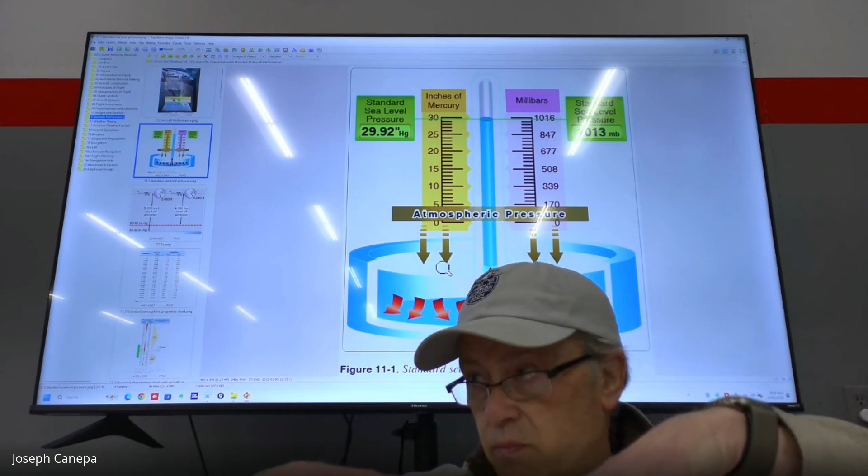Standard temperature lapse rate -- what a lapse rate is, is the change in temperature or pressure or whatever it is. It's a rate that changes as something else changes. In this case, as altitude increases, there's what we'll call a lapse rate, and you can have a temperature lapse rate and you can have a pressure lapse rate. So in the book there, they talk about standard temperature lapse rate, which is one in which the temperature decreases at the rate of approximately 3.5 degrees Fahrenheit, or 2 degrees Celsius, per thousand feet. That's important for you to know. I would highlight it and underline it because you need to know what a standard temperature lapse rate is.

What that is saying is that in a standard atmosphere, if let's say everything was standard, it was roughly 15 degrees Celsius, and we're at sea level, and the atmosphere was standard, we would be able to measure a drop in temperature at every 1,000 feet by 3.5 degrees Fahrenheit as we rose. Again, that's really important. It's a temperature lapse rate, and that's the standard temperature lapse rate, 3.5 degrees Fahrenheit.

A standard pressure lapse rate is one where the pressure decreases at a rate of approximately 1 inch per 1,000 feet. So what that means is, well, let's see -- does anybody know what the standard atmosphere is? ISA? This is something you definitely want to write down. You definitely need to know this for the test.

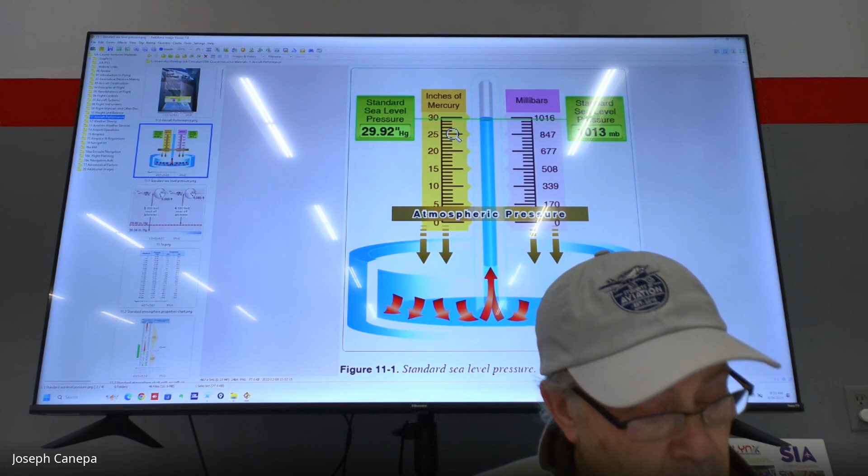29.92 for pressure. What's the temperature? Yeah, roughly 15, like 15.6, I think is where it is, something like that. Yeah, or 15 degrees Celsius, 59 degrees Fahrenheit, for a standard atmosphere. So that you definitely need to commit to memory because you're going to need to know it for the test. All right, so the standard pressure lapse rate is one in which pressure decreases at a rate of 1 inch per 1,000 feet.

So if you look over here, there's this table. This describes a standard atmosphere. So you have at sea level, 0, you have standard pressure of 29.92 inches, and the temperature should be roughly 15 degrees. And at 1,000 feet, we have 28.86 and 13 degrees -- again, 2 degrees per 1,000 feet. That's what we're seeing, that's the temperature lapse rate. If I go between all these, you can see roughly, it's an estimate, roughly 2 degrees per 1,000 feet.

With pressure, the lapse rate is roughly 1 inch. Again, it's roughly 1 inch. So we go from 0 feet, which is sea level, to 1,000 feet, we drop an inch there. Now we're down to 28 inches. At 2,000 feet, we're down to 27.

3,000, we're down to 26. So again, that's called the International Standard Atmosphere. It's this right here. That's the International Atmosphere, or ISA, as we sometimes call it.

That's something you definitely have to commit to memory. Obviously, when we go flying, it's unlikely that we would actually fly in an ISA, or International Standard Atmosphere. So we have to provide corrections to find out what our atmosphere is really going to be like and how the plane's going to perform. We'll get into this here in a second.

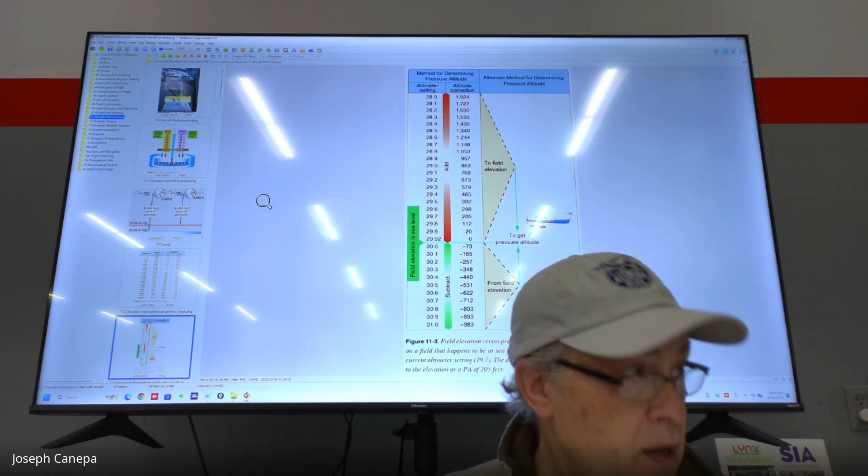Let's actually calculate what the pressure would be. Let's say our altimeter right now, the Bear-Rudell's altimeter, is 30.33. Can anybody tell me, is that a higher or lower pressure than the International Standard Atmosphere? It's a higher pressure, which tells me the air is denser today than it would be on a standard day.

So we take 29.92, subtract the current altimeter setting at Bear-Rudell's airport, which is 30.33. No, we don't just do the 30—we actually subtract the whole value. Let's work this out; you can have a calculator when you take the test.

29.92 minus 30.33, which is the current altimeter at Bear-Rudell, gives us minus 0.41. That's the difference. Well, we know the lapse rate for pressure—what's the altitude difference per thousand feet, or per inch of mercury? What's the lapse rate for pressure?

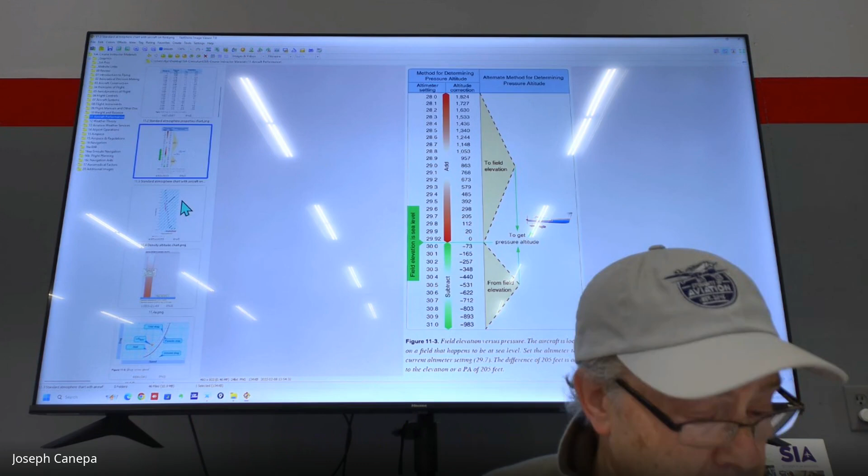So the first thing to calculate in calculating density altitude is, number one, to know what altitude are you at. Right now we're at roughly 1,000 feet. Let's see what our density altitude would be if we go from like 10 degrees all the way up to 100 degrees. So let's start at 10 degrees.

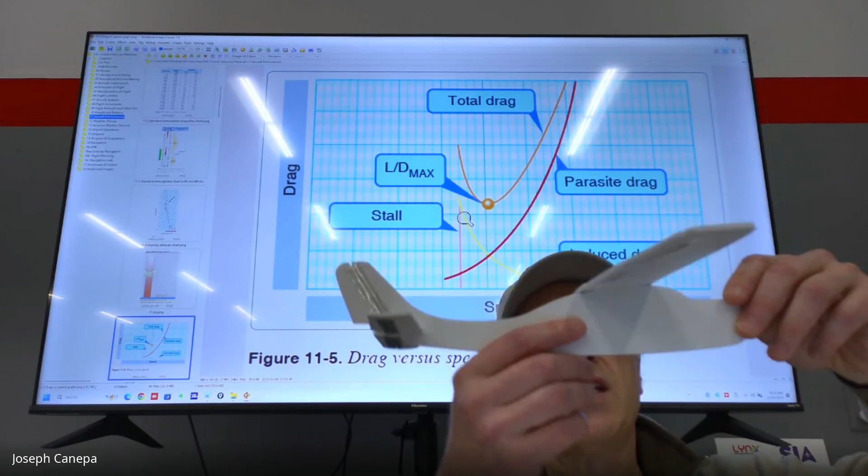So at slow speed, what this is showing us is your induced drag—the amount of drag we're inducing on the aircraft. If I want to fly at a high angle of attack, my flight path is this direction right here. As I fly along, I have to have enough thrust to keep that plane in the air. There's lots of induced drag right here. Again, the flight path is in this direction. So there's our flight path. We have to have lots of thrust to keep the plane up.

This is what we call the backside of the curve right here, this area from right here over to this side. So at slower speeds, we have to have lots of thrust to keep the plane in the air. And at some point, if the plane gets too slow, the wings are going to stall—it stops producing sufficient lift, and the plane will just go into a stall.

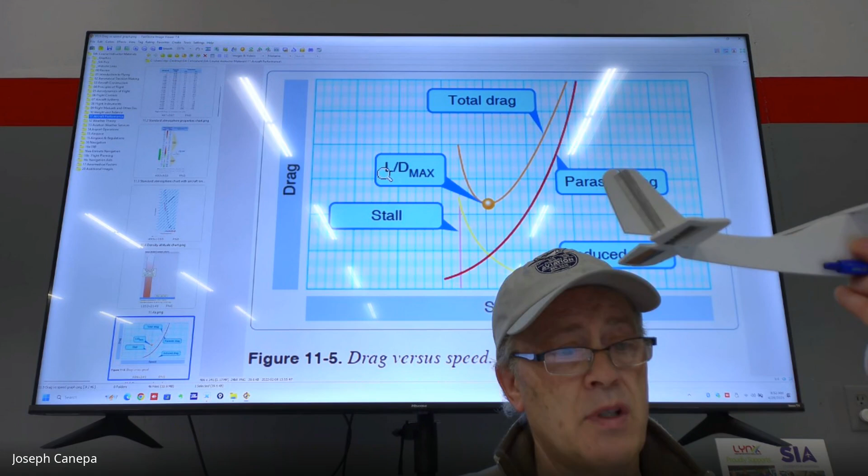As we increase our speed, let's say I start lowering my nose, keeping my altitude the same. As we start increasing the speed of the aircraft, lowering it, you'll see it gets to a point called LD max—that stands for lift to drag maximum. You're going to get the maximum amount of lift per drag at this point right here. There's a lot of numbers, a lot of performance characteristics at that point that we want to be aware of, which we'll go into in a second.

And then when we start speeding up, you can see two things here.

The induced drag decreases, and that makes sense, right? Because induced drag is when I'm flying along like this, the aircraft is creating all the induced drag.

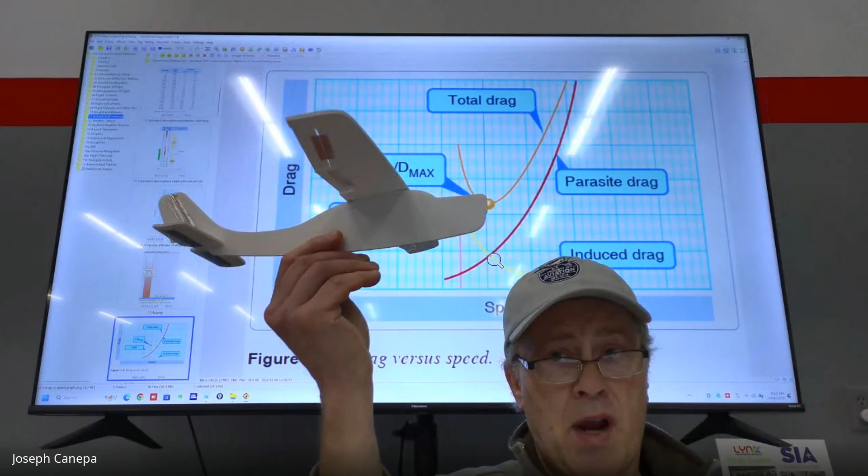We're inducing that by pulling the yoke back, and the air is hitting the wings. That's induced drag. However, when we go past this point, this L/D max point right here, induced drag just keeps dropping. So this aircraft flying like this has much less induced drag than this one flying like this. This has got lots of induced drag.

Hold my hand like this out the car window, lots of induced drag, lots of lift there. So it's producing a lot of lift, but it's just creating a lot of drag. When I lower the nose and fly straight right here, again, induced drag drops off.

The other thing that increases, however, as induced drag decreases, is parasitic drag. Does anybody remember what parasitic drag is? Speak up nice and loud.

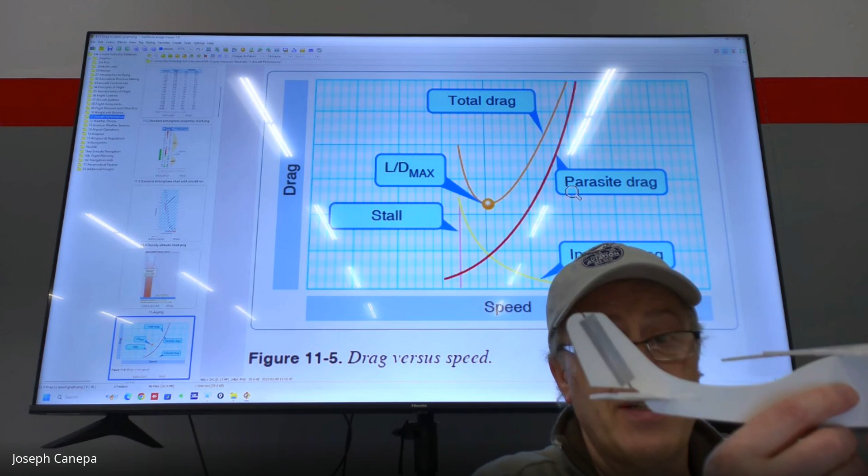Yeah, all the little tiny things, like the fairings and stuff like that, those are all parasitic drag. That's the stuff that the wind just can't get past. Again, there's always going to be some parasitic drag. It could be just rivets that are parasitic drag. So those things will all create drag.

And as you go faster through the air, that parasitic drag increases. So as our speed increases right here, you can see our parasitic drag increasing. But again, induced drag decreases.

So when you add those two curves together, this is the curve that you get. This is our drag curve right here. This half over here is the back side of the curve, and this is the front side of the curve.

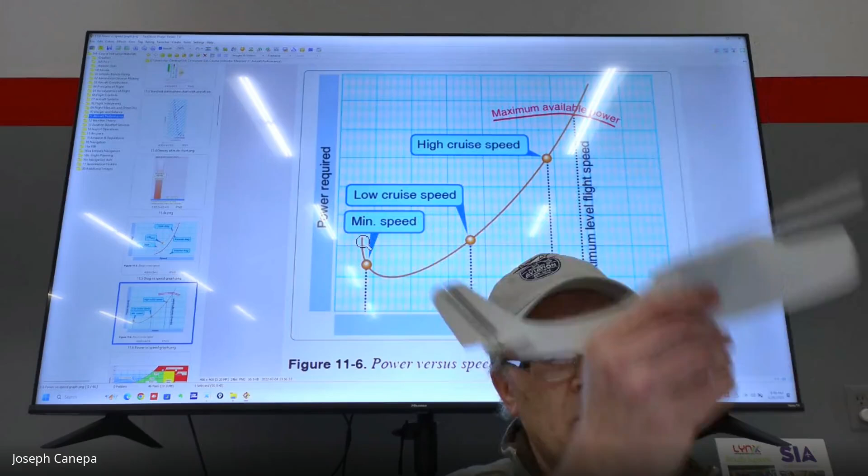And then obviously we have maximum power available. That's basically the maximum thrust that the aircraft can produce. Now some aircraft may have certain limitations. You may have lots of thrust, but maybe there are limitations on the airframe itself. It can't support going beyond a certain speed or something like that.

That has nothing to do with this. This is just the maximum power available in flight, and that would be based on the engine, the power plant itself. Okay, great. Yeah, I think we went through this before.

So let's talk a little bit about angle of climb and rate of climb. This is on page 11-17. Angle of climb refers to climbing for distance.

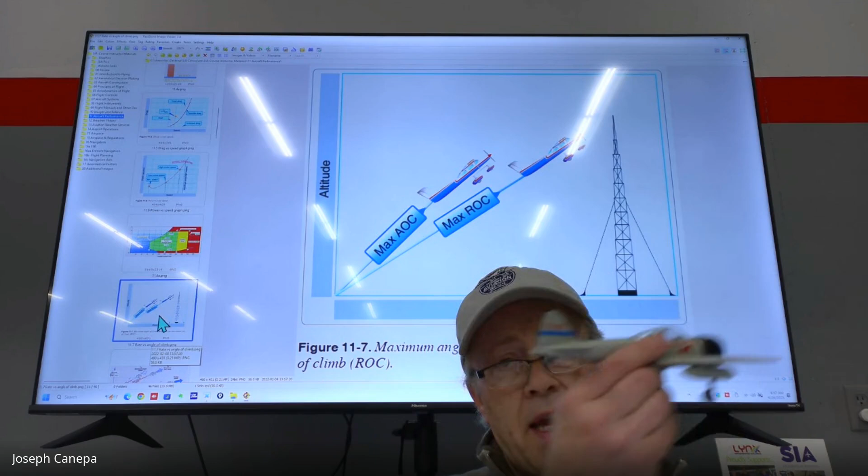So if you think of angles, let's say we've got a tower over here. I'm just going to hold this up right here. There's a tower right there. We need to climb over that. I can use what's called a best angle of climb to get over that.

There's also the best rate of climb. That's different, that's based on time. The angle of climb is based on distance. We want to get over this thing. We don't care how long it takes us, we just need to get over that tower.

And you'll find this at a lot of small airports. You'll have trees at the end of the field or something like that, and maybe you're fully loaded, maybe the density altitude's really high that day. You need to get over those trees at the end of the runway, so you're going to use your best angle of climb.

To do that, the aircraft manufacturer is typically going to have that published in the AFM, the flight manual for that particular aircraft, or the POH. It's just a number, VX is the actual velocity number that we're going to use there.

We'll see it later in the chapter. It goes over VX, that's best angle of climb. So we read that, and if it said, let's say, 60 knots, we would take off, get our airspeed set at 60 knots, and climb over that.

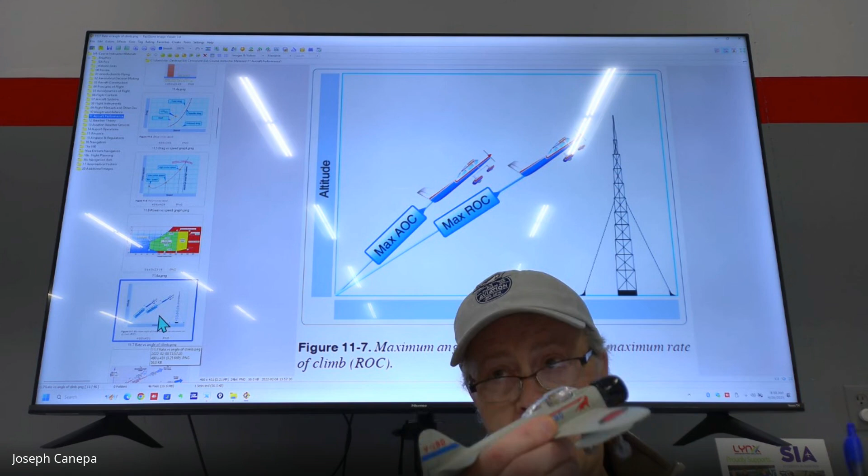Now, the difference between the best angle of climb and the best rate of climb is the best angle of climb is going to get you the highest altitude for a certain amount of distance. We don't care about climbing to altitude fast. If you want to get to altitude fast and obstacles are not an issue, then we use the best rate of climb.

The best rate of climb is based on climb per minute. AOC stands for angle of climb, and ROC stands for rate of climb. Again, VX, AOC is VX in our books, or the velocity speed of X, and the max ROC would be the rate of climb.

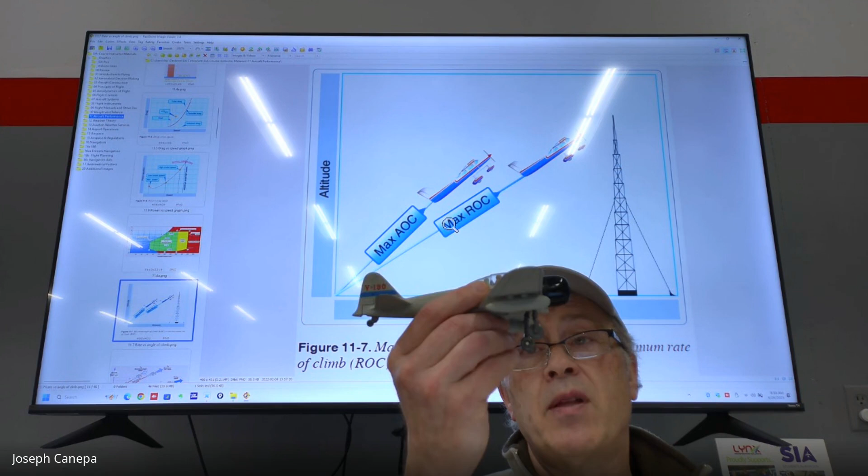Rate of climb is going to be an airspeed that is typically faster than the angle of climb airspeed. So in that case, we're climbing at a slightly different pitch, the nose isn't going to be pitched up as much. We've got full power on the engine for both angle of climb and rate of climb, but our pitch is not going to be as high for rate of climb.

What that means is if I need to get over a tower and my rate of climb is really fast, I'm going to hit that tower. If I'm using the best rate of climb, I'm going to hit that tower. Whereas with best angle of climb, it's going to take me a while to get up there, using a lot of thrust, but I'll be able to get over that tower when I fly over it. So again, that's the difference between angle of climb and rate of climb.

And again, the two velocity speeds, VX is what? Is that rate of climb or angle of climb? VX is angle. So the way to think of it is: the letter X has lots of angles in it, that's a good memory mnemonic. If you see VX, that means it's the best angle. VY is your best rate of climb, doesn't have as many angles. You'll need to know that for the test as well.

All right, let's see here. Yeah, they go through some other documents or other stuff here. Rate of climb, let's see here.

Okay, so what are some things that might affect climb performance of an aircraft? Anyone want to take a guess? Air density, absolutely. What else? How about on the plane itself? Anything on the plane that might affect it? Yeah, weight definitely is going to affect it. Yeah, the balance, absolutely. If the balance is out of the CG is too far aft or whatever, that could affect it.

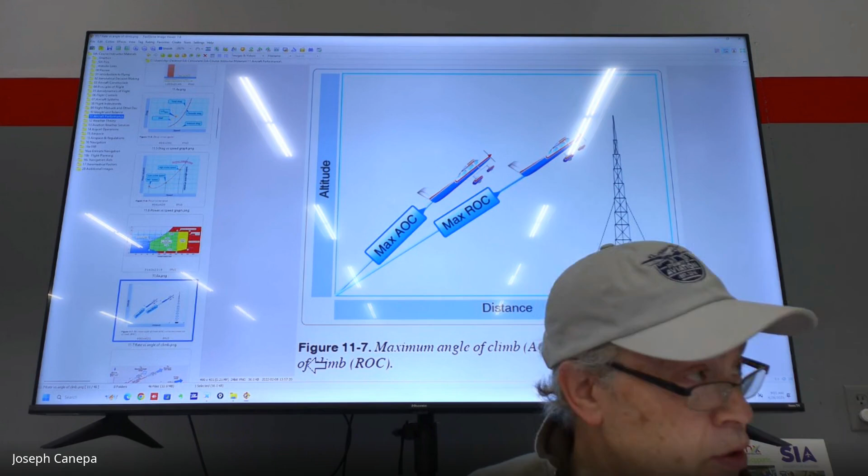Drag, yeah, but I mean, you're always going to have drag with everything, right? So unless you're carrying like a banner or something like that, it's not going to change from one thing to the other. But weight does, weight does.

And also the altitude that we're at. If we're at a higher altitude airport, is our climb rate going to be higher or lower? Let's say we're at Bearwood, 1,000 feet, we take off, and then we take that same plane out to Laramie, Wyoming, where it's like 7,200 feet, and take off. Is the climb performance going to be the same out there as it is at Bearwood? No. Why? Yeah, the air is less dense, it's at a higher altitude. Okay, good, right.

Let's see here, so there is range performance, and we'll actually dive right into the charts. They've got a lot of diagrams in there, they're great, but I don't think you're going to see any of those on the test. What I really want to get into is the performance charts and things like that.

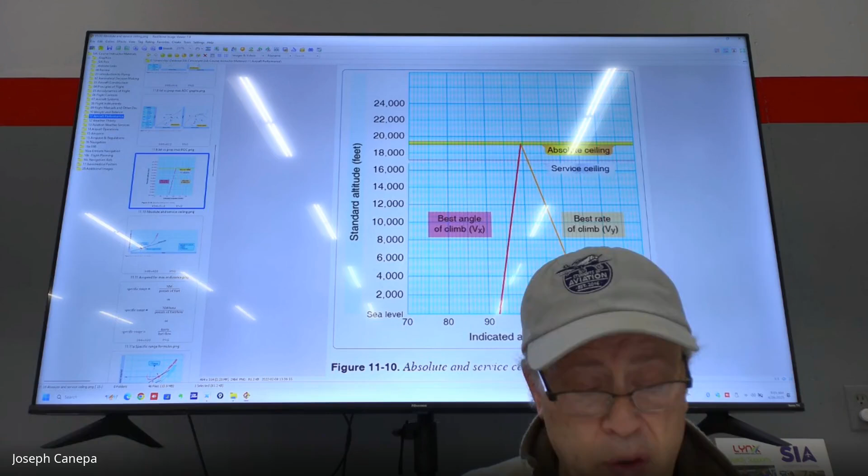Right, so range performance really has to do with how far you can take the aircraft with any given load of fuel. That's pretty self-explanatory, I'll let you read through there—we're not going to get into that, there's not a lot of discussion of it. Usually it's based on pounds of fuel on there.

Maximum endurance condition would be obtained at the point of minimum power or power required, and that gives you the maximum amount of time you can spend in the air. So again, maximum endurance is essentially: you've got a gallon of fuel, and you want to get the most time endurance. We're not worried about distance now, we're talking about endurance—how long can I keep the aircraft up in the air with a gallon of fuel?

And you're going to reach that maximum endurance condition when you've adjusted your aircraft, leaned out the mixture or whatever, and then you're going to produce the maximum endurance.

Maximum range, however, is going to be the longest distance for that same gallon of fuel. So let's say I want to get maximum range out of the aircraft—that's a setting we'd have in the aircraft, usually with power and throttle, right? If you have a constant speed prop, we'd adjust that, and then obviously mixture—we have to configure at least the throttle and mixture. We also have to configure our flaps if that would affect it. And whatever that configuration is will yield the best range of the aircraft. Again, maximum endurance, maximum range—two different things.

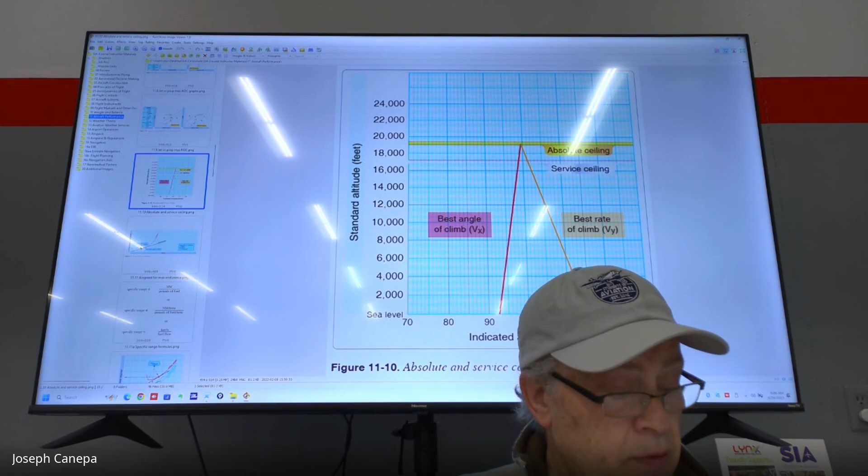That's going to give us roughly our maximum endurance, I believe—not necessarily maximum range there. There are some other variables, but what you need to know is that the aircraft will stay up in the air longer at this L/D max right here. And your range is going to be really extended if you stay in this area right here. Okay.

Some other things to consider on page 1112: runway surface and gradient. A grass strip is going to create more drag on the aircraft. When it lands, those wheels hit the soft ground, and there's a lot of drag there. When you're trying to take off, as those wheels move along the grass, there's drag on that too, so you have to overcome it as you apply power.

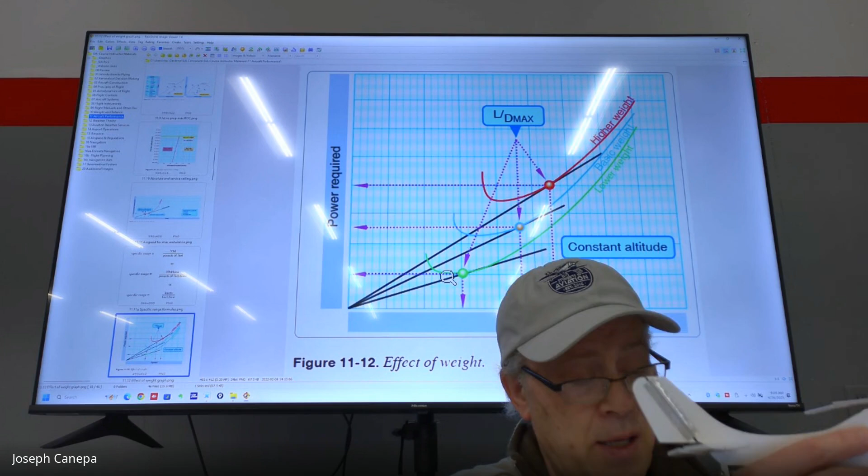There's a special technique we use when we fly grass strips, especially short ones. We try to get into ground effect, stay in it, and accelerate in ground effect, not touching the grass. So we want the aircraft just above the ground, accelerate there, and then take off. That's the challenge with runway surface.

You may be landing or taking off at a grass strip. Again, a gravel strip is going to have lots of drag, a grass strip is going to have lots of drag, but cement or asphalt is not going to be so bad — it's going to have less drag on the wheels.

And then there's the gradient of the runway itself. If your runway slopes upward and you've got to take off, we have to overcome the effects of gravity on the runway, so we're going to have to give it more thrust. It's probably going to take a lot more runway to build up enough speed to take off.

If we have a gradient downward, that's a steep place — there are places out in Nepal that have really steep runways. But in any case, if the gradient slopes down like this, gravity is working for us, and we can build up thrust really fast and take off from there. So those are performance considerations.

The other thing is water on the runway — we talked a bit about dynamic hydroplaning. This is on page 1113. Water on the runway always reduces friction between the tires and the ground, and it can reduce brake effectiveness.

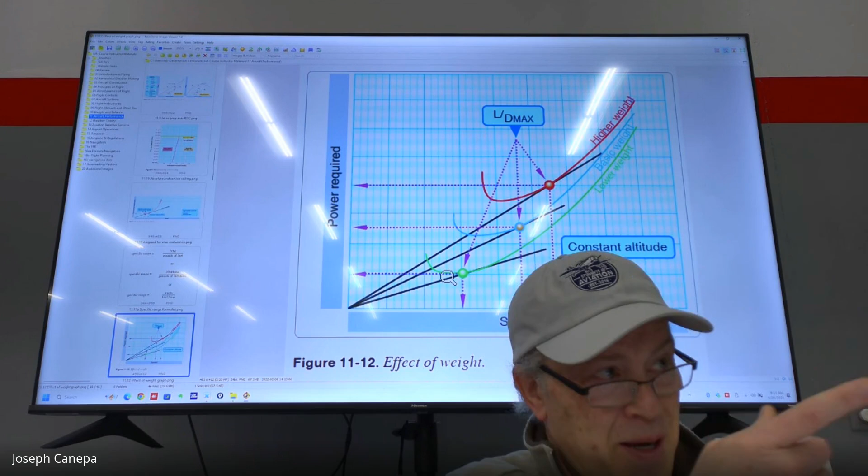Yes. Go off on a cliff? You could, it is possible. The drawback is you'd have to make sure you didn't get into a spin as you fall off of it. But if the aircraft stays in the proper orientation, yeah, absolutely, you could go right off the cliff like that James Bond movie — I forget which one, where he drops off it. So it is possible, yeah.

As long as the plane doesn't start a spin prior to building up airspeed — and that's a good point, because when you get into a stall, the wings stop producing sufficient lift and the nose is going to drop. The first thing we want to do is push the control yoke in, not all the way, just relax our pressure on it, which causes the nose to drop and airspeed to increase immediately. Air starts flowing over those wings again, and they start producing lift to keep the aircraft going.

All right, so let's take a look at some charts here. This is a typical chart you'll see in a lot of Cessna manuals, and we're actually going to walk through a couple of these processes. So, takeoff distance — notice this would be a page taken right out of the Pilot's Operating Handbook, or the AFM, the Flight Manual. So you've got conditions, and this tells you what the standard conditions are.

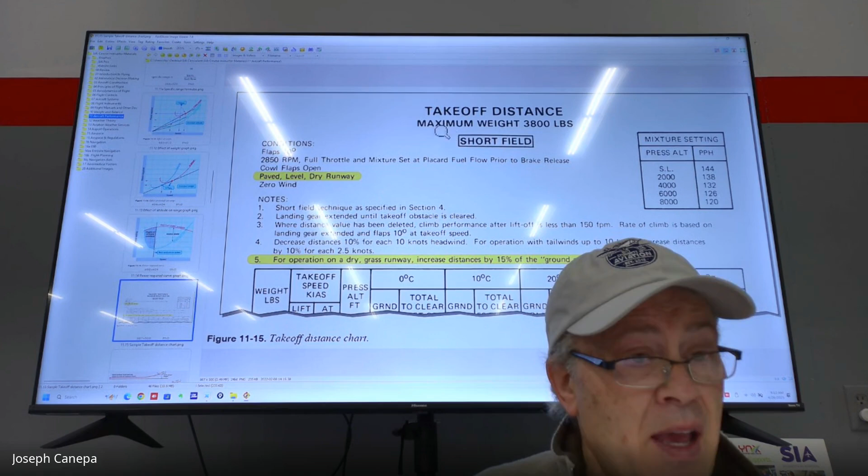Obviously they can't print a page for every type of condition the aircraft is in, but it gives you a rough idea of how the typical aircraft performs, and then you have to apply that to your situation. In this case, for this short field maximum takeoff distance, at a gross weight — maximum weight of the aircraft — of 3,800 pounds, flaps at 10 degrees, full RPM, full throttle, mixture set, and placarded fuel flow prior to brake release. So if you're at a high altitude airport, this may not apply.

The mixture may be set differently, cowl flaps are open. Does everybody know what cowl flaps are on the aircraft? The fronts of the engine cowling actually open up to allow air to flow through the engine, those little flaps that open to let air flow across it.

The driveway or runway is going to be paved, level, dry, and zero wind conditions. That's what they're telling you are the conditions they used when they tested this aircraft. Your conditions when you take off are going to be different, and you're going to have to use judgment to get something close to what you think the aircraft performance would be.

They talk about short field technique in section 4 of the manual. There's a section that describes in detail all the techniques you should use. In any case, you're going to see a lot of charts like this, and they blocked off over half of this one. So let's actually get into one here.

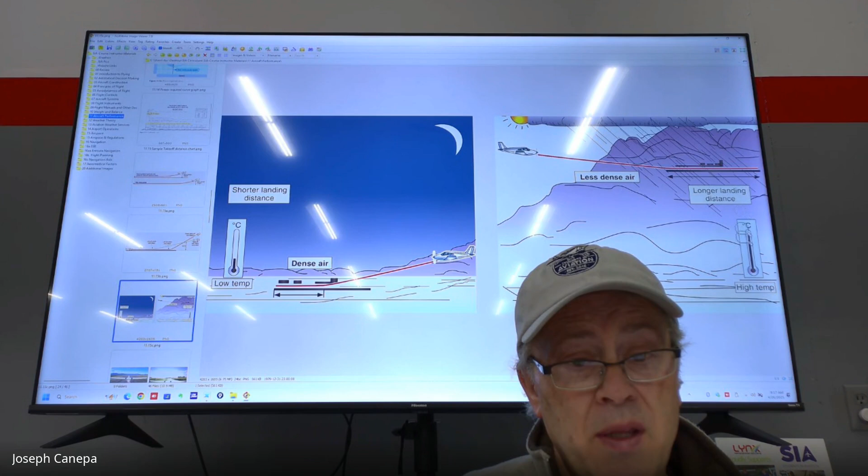If you have denser air, or lower temperature, as the airplane comes in it can use less runway. If this was less dense air, this plane would actually be using more runway. Here's an example where the plane is at a higher altitude airport, up in the mountains, so the air is less dense because of the altitude, and it's using up more runway. The other thing that can affect it is temperature - that's what they were trying to illustrate there.

You have different surfaces here - you've got a grass surface and a paved surface. In the chart supplement, which you won't find anywhere else, I think you can download chart supplements - yes, you can, I know. You can go to the FAA to download chart supplements.

Basically what chart supplements are is they actually have all of the runways in the US, and they give you specs on the runway. So like here, this particular airport is Jeffco in Colorado, and they've got runway 11 left and 29 right - it's 9,000 feet long, 100 feet wide, asphalt and grooved. That tells us right off the bat, if I go to that airport, what I'm going to be facing.

As a pilot, you should know these things before you land at an airport. So if I take off from Baraboo and I want to fly to this place, I should know the runway orientations there, if there's grass runways, whatever. And you can see here, it's got the grade, that's your slope, your gradient there, and then 5% off. Any case, that's what you're going to find in the US chart supplements, something that FAA produces.

Tire pressure - we don't think about that, but it can affect the drag. So if you have high pressure, your wheels pumped all the way up, you're going to be able to roll a lot easier than if the pressure of the wheels was let down quite a bit. It also affects the hydroplane of an aircraft.

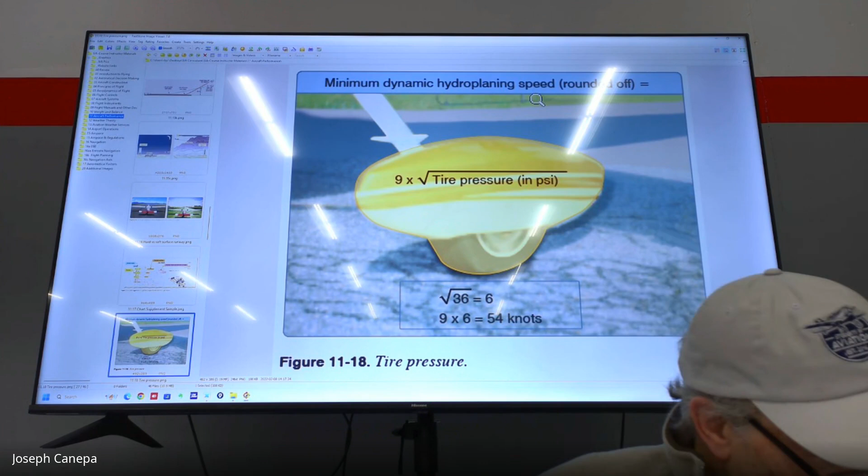They go into it a little bit, so you can actually calculate when hydroplaning begins on a wet surface. I don't think you're going to actually see that on the test, but it's good to know. They actually have the formula here to calculate it. I'm not going to go into it, just know that hydroplaning is a potential issue, especially on wet surfaces.

Another thing that affects performance is tailwind and headwinds. Do you think it would be better to have a headwind coming in for a landing or a tailwind? Yeah, you want a headwind. Why is that? Why would you want a headwind? Yeah, to reduce the speed - you want to touch down at the slowest speed possible.

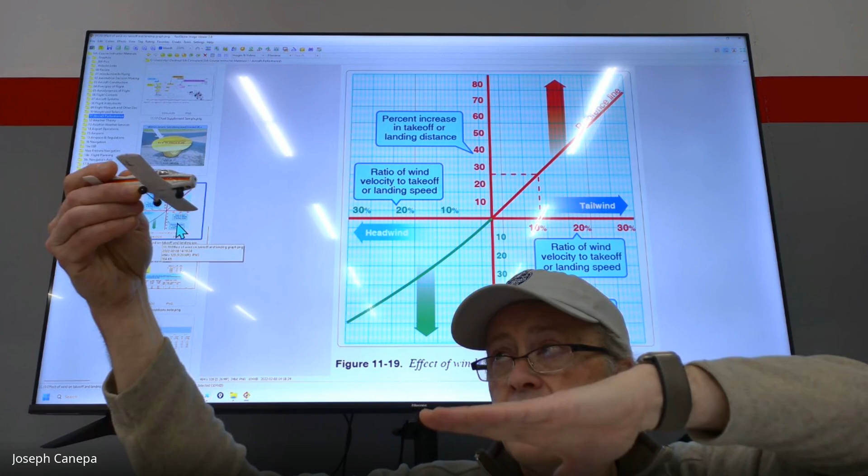Having a headwind keeps that aircraft going slow. To you it's not going to look any different, other than it's going to feel like you're coming in a little bit shorter, you've got a good landing. But if you have a tailwind - we're in a parcel of air up here, the aircraft has to maintain a certain airspeed in that air. But if the air is also moving, it's moving the aircraft much faster.

It may be coming down at the same angle as an aircraft with a headwind of 20 knots, but because the air it's in is moving with a tailwind, it's pushing the aircraft along. So we wind up taking up a lot more runway, and I mean a lot. 10 knots doesn't sound like much, but if you have a 10 knot headwind and you go around and land in the opposite direction, it's a huge difference. You eat up more runway. It's more challenging coming in because it's harder to judge how much runway you're going to use since you're moving so fast on the ground. So the ground speed with a headwind is going to be lower than the ground speed with a tailwind.

Here they talk about a headwind that is 10% of the takeoff airspeed reducing the takeoff distance by approximately 19-20%. So if it takes me 1,000 feet to take off in my airplane, with a 10% headwind, it's gonna decrease my distance down to 800 feet to get off the ground. So it has a huge impact.

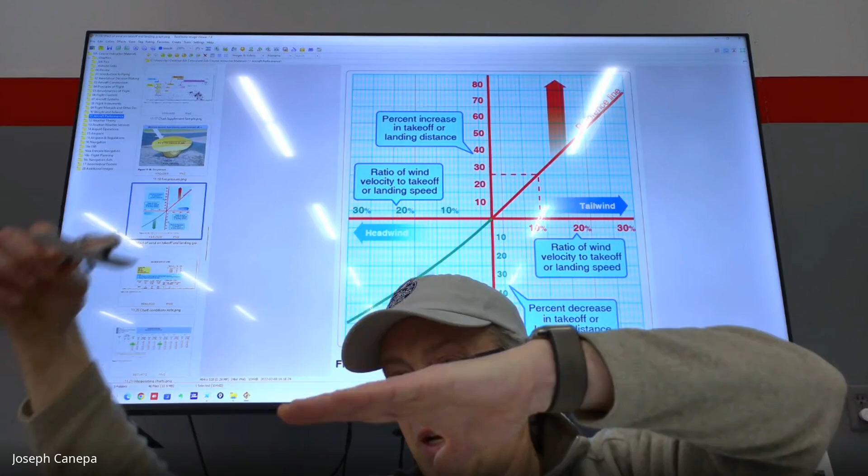So let's say you're coming in for a landing. You want to know, if you were driving, if you had a car below you that was mirroring you, you want to know how fast that car's going, right? Is that what you're saying? No, you don't need that - you can use GPS. Most, like you get ForeFlight, there's dozens of devices you can get, but basically a tablet or smartphone.

I've got ForeFlight on here, and it actually tells me what my ground speed is, so I could use that. Generally speaking, you're going to use your best judgment, you're not going to be referring to ground speed. Although when you have a real high headwind coming in for a landing, it's actually kind of fun to see what your ground speed is. In some cases, like with a Cessna 150, we can take that up and actually fly backwards. It's a really weird sensation, but if the winds are sufficient enough, you can get the plane slow enough in the air and the ground speed will actually be negative, and you'll actually be going back.

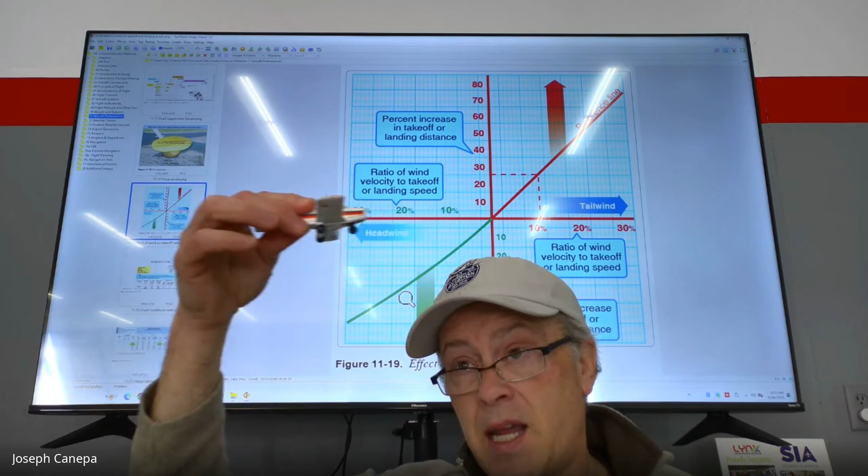Sorry, say that again. You can do that with your RC, yeah. Look back, uh-huh. Yeah, that's a good example for it. You should actually videotape this or record it sometime.

So let's jump to page 11-18. Performance speeds, I'm not going to go into, we've already talked about these.

Performance speeds, again, we've talked about all of these, but let's just quickly review them. True airspeed is the true airspeed of the aircraft, not what you read off the airspeed indicator. That's indicated airspeed. Anytime we see the word indicated, it's talking about what you're seeing in the cockpit, what the gauge shows. Calibrated airspeed has to do with corrections due to calibration errors in the aircraft, the way it's set up.

Equivalent airspeed, we don't use that much. Let's see, VS0 and VS1, those are two big ones you need to be aware of. First off, VS, what does VS stand for, without looking at the book? V speed, VS, anybody want to take a guess? Someone said vertical speed. V stands for velocity, yes, but what does the S mean? Stall speed, yes, stall speed, yep.

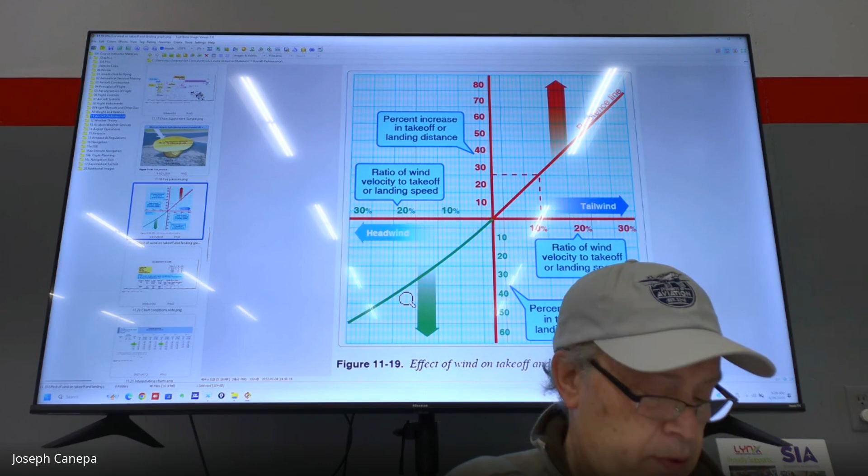Okay, so let's see, maximum—that's 20. Here it goes, right here. This is on page 11-19. So with all this stuff, it gets to this point right here.

So we need to take off. In order to fly our plane effectively, we can't just wait for a standard atmosphere day to come—you'll probably never have that in your life. There'll never be a day when the pressure is 29.92 inches and the temperature is 15 degrees Celsius. So we have to use performance charts to determine whether our aircraft, its loading, and the weather conditions are safe for takeoff, and also to determine what kind of performance it's going to have, like how well it's going to climb.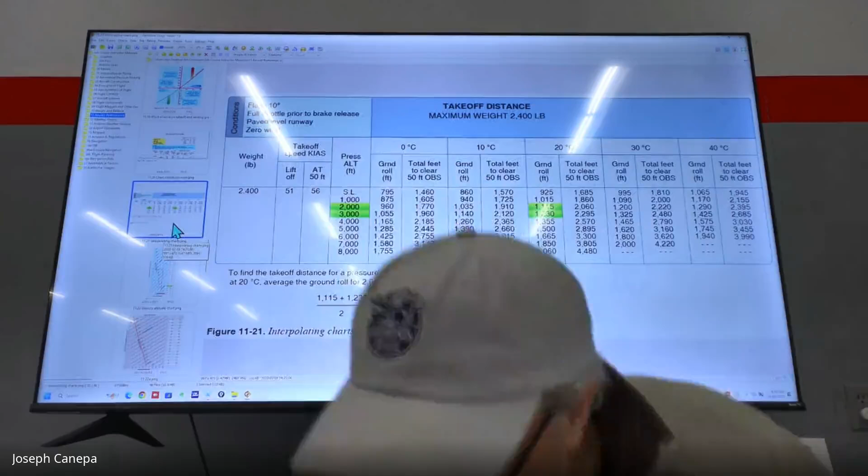Let's actually walk through one of their sample problems. There's a term called interpolation—does anybody know what that is? Interpolation has to do with coming up with an estimated value between two other values.

Let's say I have a value of 500 feet and a value of 1,000 feet—it can be for anything, altitude or whatever. Interpolation refers to saying the altitude you're at is going to be, say, 50% of the difference between 500 and 1,000 feet. What would that be roughly? 750 feet—that's interpolation.

You'd normally use a calculator, but let's say it's 20% from 500 to 1,000 feet. What would that be? 600 feet. So you're interpolating based on another value. If it's a 20% difference, that's an increase of about 100 feet.

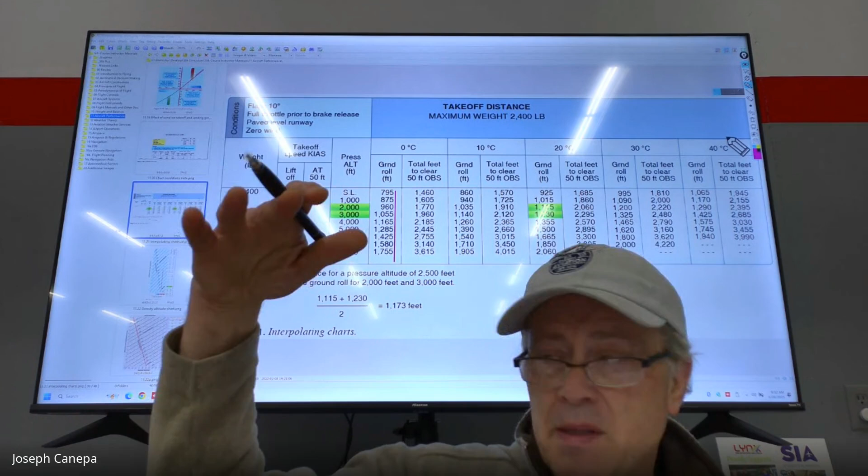So that's what you're doing—interpolating between values. The reason we use interpolation with these charts is that we can't come up with all the different numbers. They could produce a chart for every condition, but it would take a book maybe a couple thousand pages long. We just want rough ideas of how well the aircraft is going to perform.

In this chart, we're calculating takeoff distance, based on a maximum weight of 2,400 pounds, flaps at 10 degrees down, full throttle, paved level runway, and zero wind. So let's see, if we're given a problem here...

In your book, it's sample problem 2, talking about takeoff charts. Pressure altitude is 2,000 feet, outside air temperature is 22 degrees, takeoff weight is 2,600 pounds, headwind is 6 knots, and there's a 50-foot obstacle.

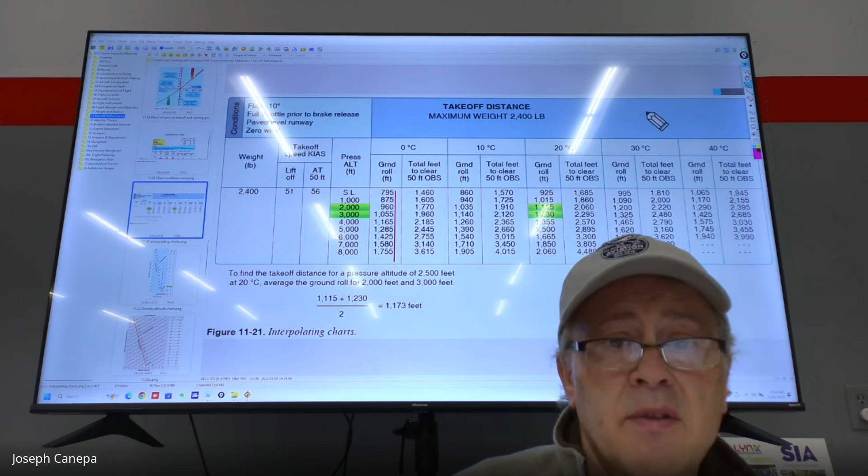This is a typical problem you'll have to solve on the written test. They say refer to figure 11-23—oh wait, sorry, let's back up. Let's go to sample problem 1 first to figure this out; that's a little easier to start with.

That's referring to this diagram—sample problem on density altitude charts. We just did this, so it should be pretty easy. Use a density altitude chart to figure the density altitude at the departing airport, using figure 11-22, this figure right here. Your airport elevation is 5,800 feet, outside temperature is 70 degrees Fahrenheit, and the altimeter is 30.1. With those given, we need to calculate our density altitude.

The first step is to compute the pressure altitude conversion. Find 30.1—our given altimeter setting is 30.1 inches of mercury, found over here. This, by the way, you'll have on the test—they'll print this out, eliminating the need for you to do math in your head. You can just look at this chart.

To find the pressure altitude conversion, you look for 30.1 inches, which is right here, and read across—minus 165. Under the altimeter heading, you find 165. Therefore, it's necessary to subtract 165 from the airport elevation. So what is our airport elevation in the sample problem?

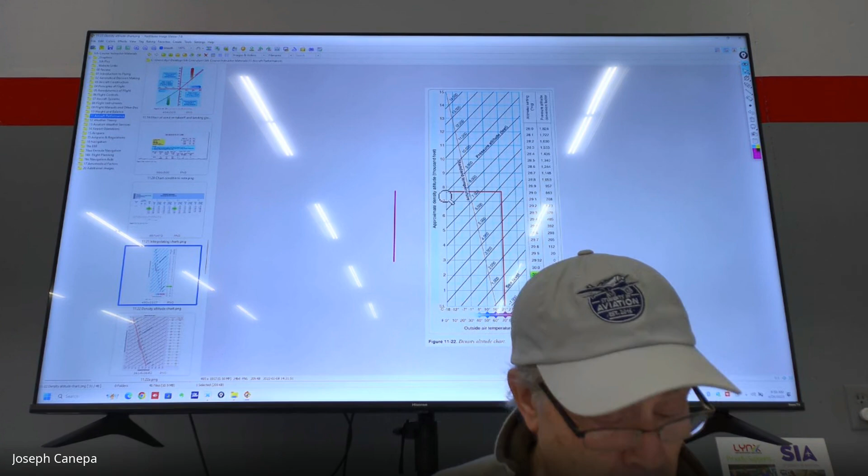Yeah, all right, good. So here, takeoff chart. Let's take a stab at that takeoff chart there. And this is using, it's this one here. Okay.

So sample problem 2, this is on page 11-20. The sample problem is on 11-20, but the chart we're going to use, the figure, is on 11-22. This is what the figure should look like right there.

So, given these items: pressure altitude is 2,000 feet, outside air temperature is 22 degrees Celsius. Again, always watch for units there because they go back and forth between Fahrenheit and Celsius. They want to make sure you catch those things. Takeoff weight is 2,600 pounds.

Headwind is 6 knots, obstacle height is 50 feet, which is pretty standard. Usually when they give you a problem, they'll say the obstacle height is usually like 50 feet, which is not uncommon here.

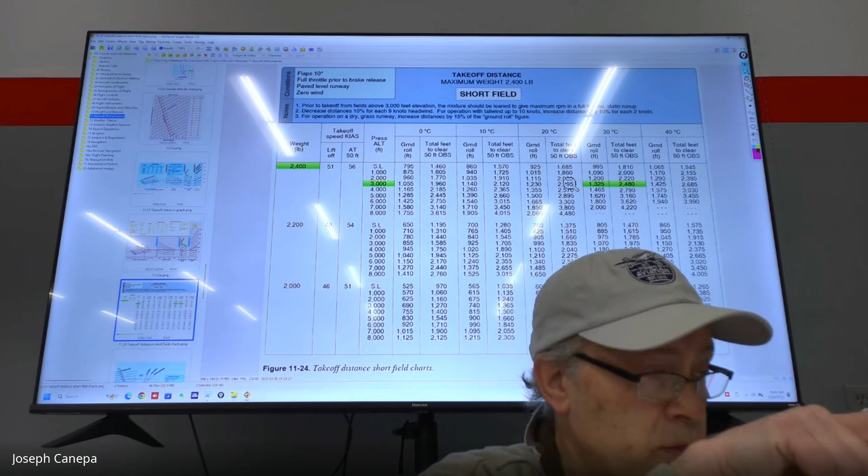Not necessarily. Like, Bearwood doesn't have any 50-foot obstacles. I've got the Cessna 150, let's say I'm going to take that off. The only thing I'm really concerned about is making sure the engine's running, making sure it's got oil, and making sure the weight and balance is correct. This is something you need to do every single flight. There are programs that do that, and it doesn't take very long at all. But outside of that, you've got 5,000 feet of runway here, and the plane may only take 500 feet to get off the ground, so I don't really need to do the performance calculation on it.

Now if I was taking that same plane out to Laramie, Wyoming, or someplace with a higher altitude airport, yeah, I would probably do a performance calculation on it ahead of time, just to know. As a private pilot or student pilot, you're going to have to know this stuff, and you're going to have to show your instructor that you know how to calculate performance on every single flight. They're going to want to see that. They're going to want to know that you know how well the aircraft is going to perform, even though you know you've got plenty of performance to take off from this airport or land at this airport. So to answer your question, it depends.

As a student pilot, you should be practicing it every single time. There have been a lot of situations where pilots have gotten themselves in hot water because they didn't calculate performance. I'd say there's been a couple times where I've been really close. A long time ago I took off - I was a very young pilot, arrogant - and I took off from the airport with another instructor. There was a 50-foot obstacle, it was a very short runway, and we just barely made it over the trees. It was scary. The stall warning was actually just starting to go off as we were passing over the trees. Had I sat down and done the performance calculations, I probably wouldn't have taken off there, or I would have lightened the load of the aircraft.

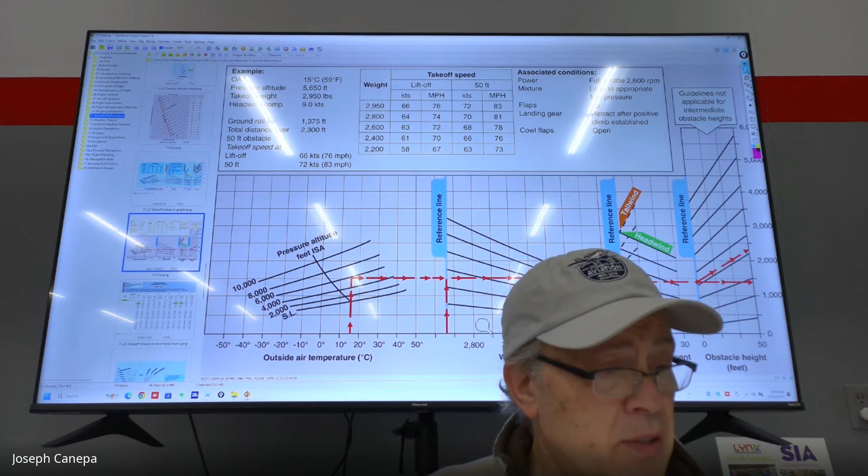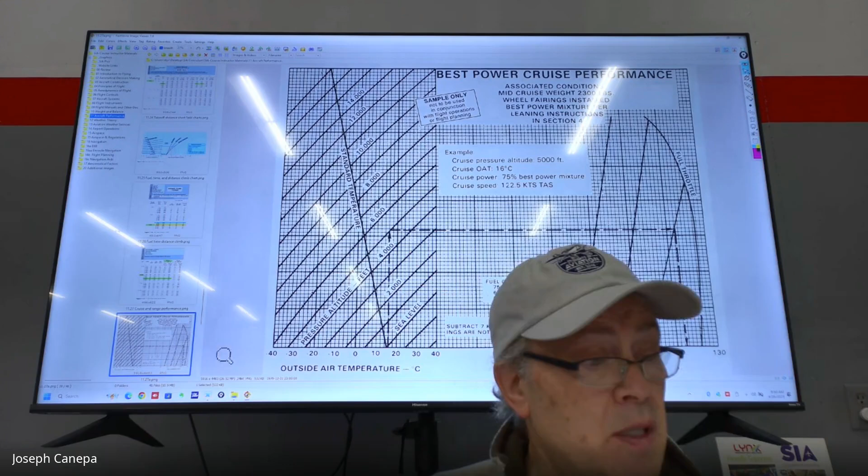You can actually break it up into headwind component and crosswind component. The headwind component is what is heading directly into the flight path. The crosswind is the wind that would be effectively pushing it from the side. This is important because most aircraft have a limitation on how much of a crosswind component they can deal with. If it's a really strong crosswind component, they may not be able to compensate for it, and you wouldn't want to take off. So this just breaks it apart.

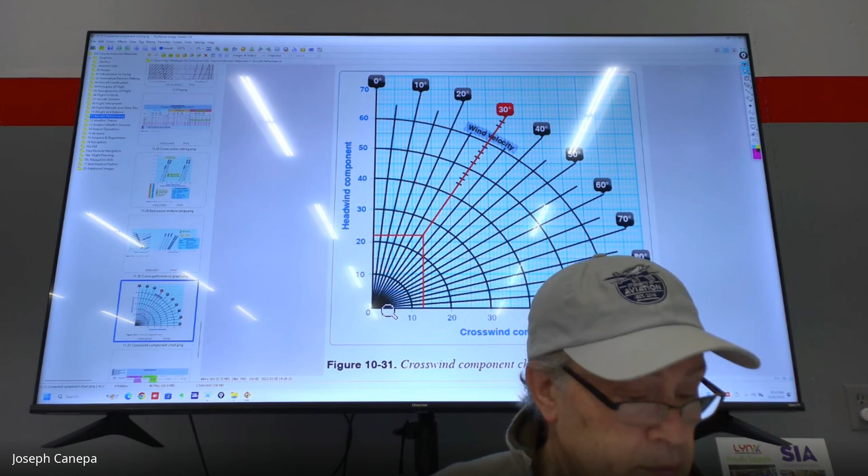And the other question - so the crosswind component chart is marked as 1031. It's actually 1131. And here it says refer to figure 1032, when really it's 1132. Good point, thanks for pointing that out. I don't know why that was a mistake, but it happens surprisingly often. This is a great book, it's the one that we choose, but they do have some flaws in it.

I think they've just released a new version of this, but since you guys have the printed one, you don't have the updates. So does everybody's book right now - if you look at the crosswind component chart, does it say 1131? It says 1031, okay. So that's still off then. Hopefully they'll get it fixed in the latest version - if you download the latest PDF, they may have corrected that.

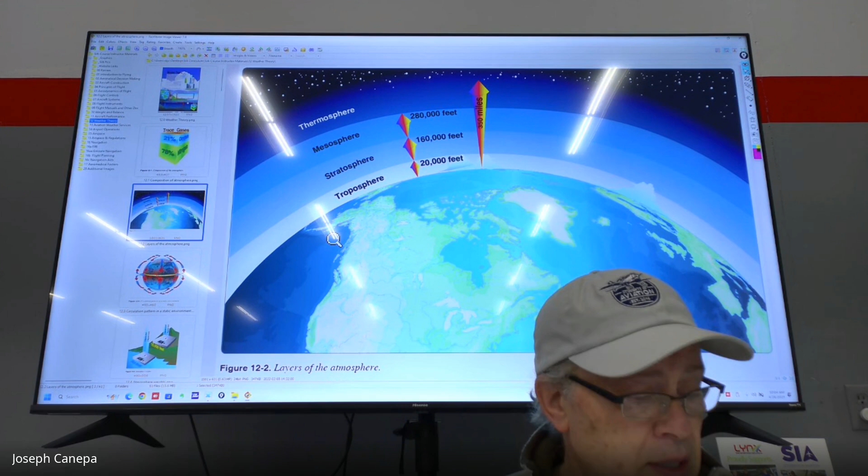Now let's talk about lapse rate. Inside the troposphere, the average temperature decreases at a standard rate of about 2 degrees Celsius per 1,000 feet. So if the temperature at the surface is, let's say, 10 degrees Celsius, at 1,000 feet it's going to decrease to about 8 degrees Celsius. And if we go up to 2,000 feet, the temperature is going to be even less, again using that standard 2 degree Celsius lapse rate.

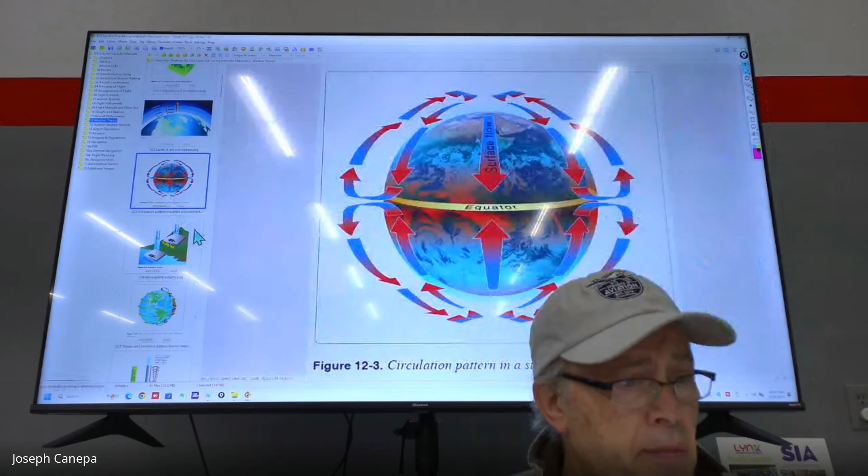I think we all know this, we've talked about it before - if you took a column of 1 inch of air and ran it all the way up to space, and put that column of air on a scale, it would weigh 14.7 pounds. We feel it right now, we just don't notice it because we feel 14.7 pounds per square inch on us all the time, so we're used to it. If we go up in altitude, that pressure is going to keep decreasing.

We'll start feeling it maybe at 20, 30,000 feet - we'll really notice it, it'll be hard to breathe. So here at 18,000 feet, our pressure drops almost in half, down to 7.4 pounds per square inch.

Okay. Let's see here.

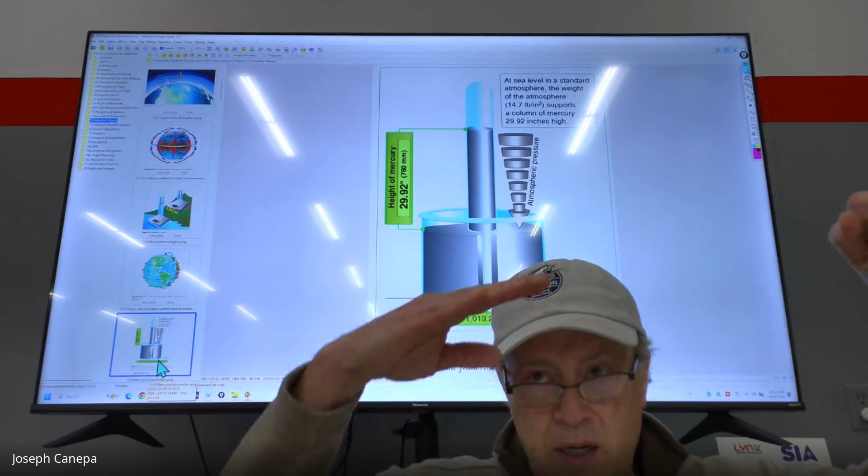That means the pressure is changing, the temperature is changing, winds are changing, things like that. So the atmosphere is never static. You might have a few days out of the year where the temperatures are exactly the same, the pressures are the same, but eventually it's going to change. You just don't see constant pressure and temperature and everything like that last for weeks on end. Because the Earth is in motion, the rays of the sun hit the Earth. The tilt of the Earth also affects how much heat the Earth gets. Obviously we know that because in the summertime it's really hot, and it has to do with the poles shifting a little bit as we rotate around the sun.

So again, let me read it one last time just to drill it home. The atmosphere is almost constantly in motion as it strives to reach equilibrium. The one thing about the atmosphere is it does try to get to equilibrium - if you've got a high pressure area here and a low pressure area here, the high pressure is going to try to go to low pressure. It's going to flow through there. And then low pressure may be sucking in air from the high pressure or whatever. But it's going to try to get those two areas equal.

So maybe this is over Minnesota and this is over Wisconsin. This is high pressure in Minnesota and low pressure in Wisconsin. Well, the high pressure in Minnesota, if the Earth wasn't moving and nothing else was affecting it, would try to equalize. Here's the problem - the Earth is rotating. You've got all these other factors and it creates weather, which is incredibly complex. So you have these things going from trying to reach that equilibrium, but because all these other things are taking place, the Earth's rotating, whatever, it's never actually going to get to equilibrium. It's going to try to, but it's not.

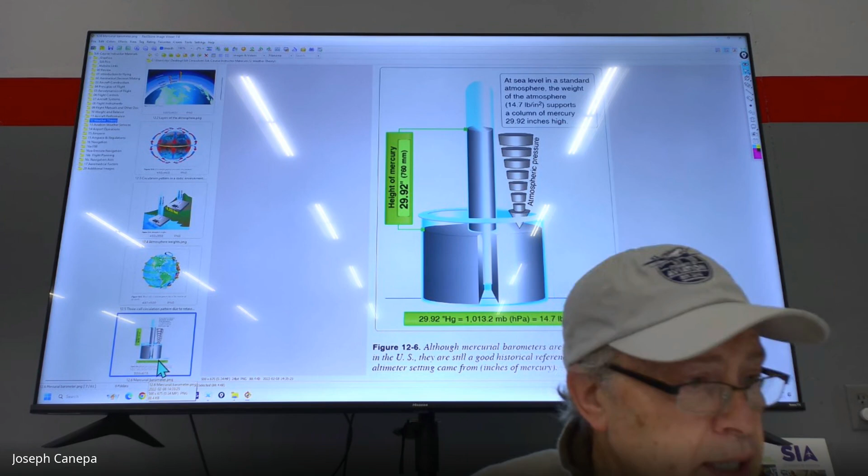Pressure gradients. This is something you'll see in weather charts.

So now that you know a little bit about weather, you'll probably want to go online. You can go to NOAA. There's a weather.gov site you can go to, and they have a lot of charts that you can view.

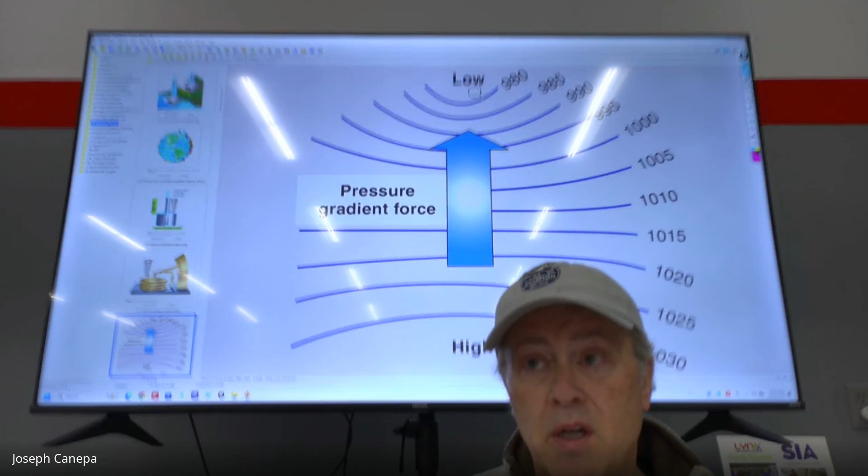Low pressure, as a general rule, always brings poor weather. Always, you're going to have storms with low pressure. You generally don't see that with high pressure, but you see it with low pressure, a lot of storms. Hurricanes are all low pressure. The eye of a hurricane is super low pressure, you actually feel it. When we get tornadoes, it's usually in a low pressure system.

And because of all of these changes, let's see if I can find this. Again, at Denver, you may have a pressure. Well, first off, let's talk about this. Does anybody know how high Denver is, roughly, in feet? Yeah, about 6,000 feet.

Yeah, it's the mile high airport. It's basically a mile high, which is roughly 6,000 feet. And because of that, the station pressure at Denver, on a standard atmosphere, is 24.92. At sea level in New Orleans, it would be about 29.92 on a standard atmosphere.

So again, there's less pressure. This makes sense, we're not learning anything new here. At 6,000 feet, the pressure is going to be lower than it would be at sea level, like New Orleans. And again, we're basing it on a standard atmosphere. Does everybody know what a standard atmosphere is? What are the numbers for a standard atmosphere? 29.92, and what for the temperature? 15 degrees Celsius. Yeah, good.

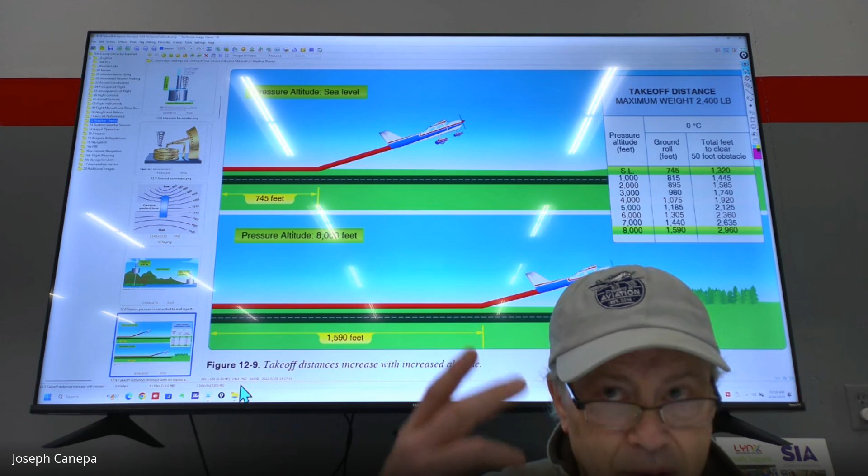32 degrees Fahrenheit, which is freezing, equals 0 degrees Celsius. And then you can actually figure out the formula by going up to the boiling point, which is 100 in Celsius and 212 in Fahrenheit. Based on that, you can kind of create your own conversion. But again, that's way too complicated, you don't need to do that. Just look at the charts.

Most average people become somewhat impaired at an altitude of about 10,000 feet. For some people, impairment can actually occur as low as 5,000 feet. This is nothing new; we know this from people that climb Mount Everest.

When they say impairment, they're not talking about instantly becoming unconscious at 10,000 or 5,000 feet, but your vision does taper off a little bit at 5,000, and especially around 10,000 feet at night. Your nighttime visual acuity drops dramatically. You can even go up and test it.

Sometimes people fly with somebody over 5,000 feet. If they've got oxygen at night, just take a hit of that oxygen and you're going to see a huge difference in how bright the stars become after you take in that oxygen. So again, it does affect everybody. It's something you need to be aware of.

So that's altitude in the human body. That was one of them. Here's pressure altitude at sea level—obviously the plane's going to perform really good at sea level. When we move that pressure altitude up to 8,000 feet, this plane's going to need a lot more runway to take off. Again, that's what we went through last session.

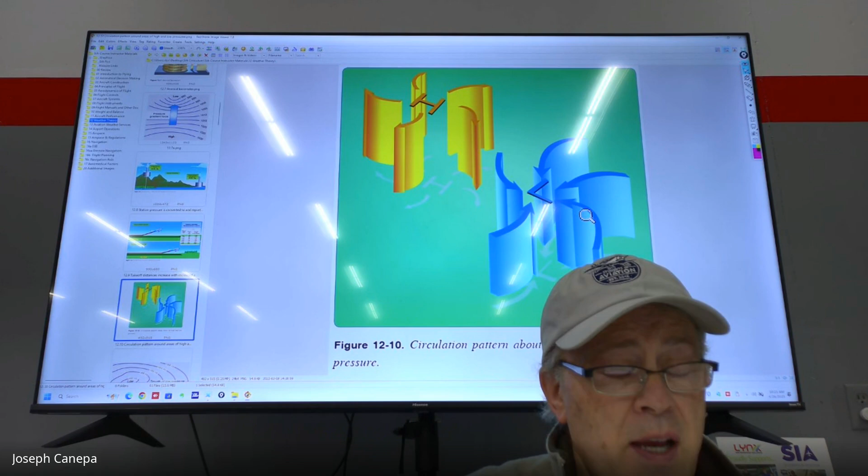You oftentimes hear weather forecasters use the term 'weather trough.' A trough is something like a valley, down deep—that's where a low would exist. So when they say trough, they're talking about low pressure, usually an area of low pressure. If you hear them say that sometime now, you'll know what that means.

So the faster the rotation. If you have a really strong low, super strong, you get a tornado or a hurricane primarily. If you look at the eye of a hurricane, it's extremely low pressure, because all of the air is just getting sucked into the center of it. Hurricanes rotate really fast. A really strong low in the center of a hurricane is going to produce more weather because the pressure gradient is so much steeper.

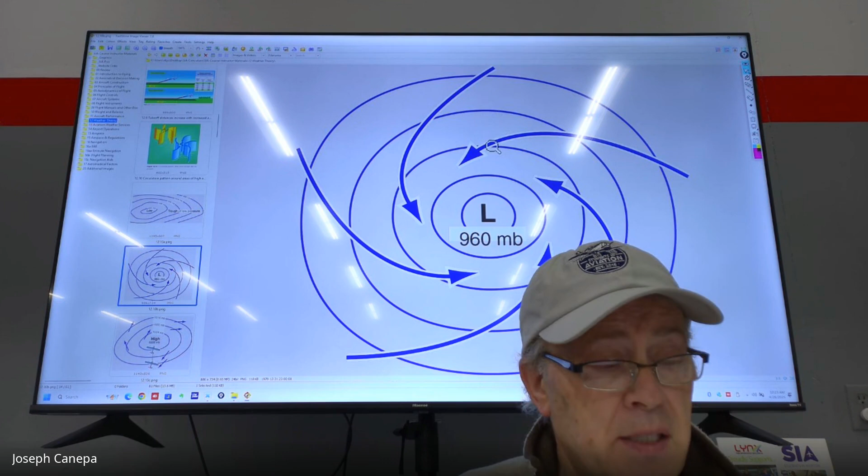So if I'm traveling north, just south of a low pressure area, I would expect winds out of the west. You can count on this every single time a low pressure system comes in. Go online, look at the weather charts, and you'll see the winds are always out of the west on the south side of the low, and out of the east on the north side. It's the opposite for a high pressure system.

Why do they rotate counterclockwise in a low pressure area and clockwise in a high pressure area? Because the earth rotates. This gets back to the Earth's Coriolis force, and it's going to affect them - they flip. Good point.

So if this is in the northern hemisphere, in the southern hemisphere it's just the opposite. If you're flying down there, those are rotating the opposite direction of the high, and the high is rotating the opposite direction too. But up here, since we're in the northern hemisphere and primarily concerned with the U.S., because you're getting a private pilot's license in the U.S., we're going to focus on that. But it was a good point - I'm glad you brought it up, because that's what the Earth does. It creates those circulation patterns, and it does affect the high pressure and low pressure.

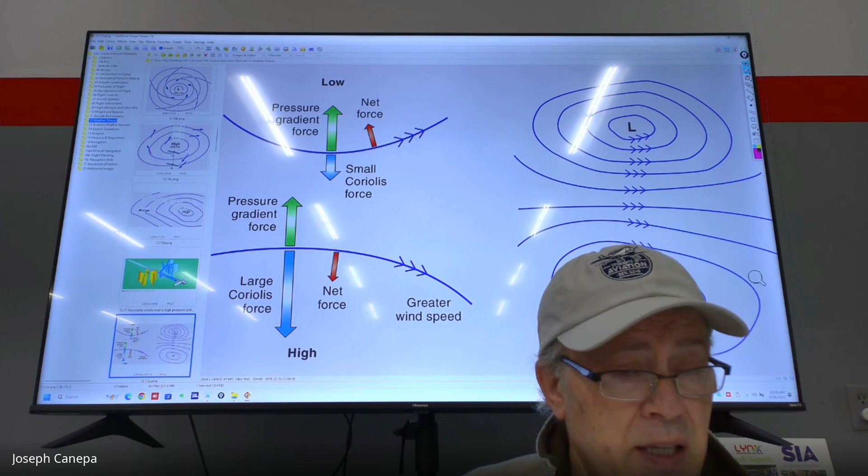This talks about the pressure gradients. The air in a high pressure system wants to travel to the low pressure, but you've got air moving anticyclonic - counterclockwise in a low, and clockwise in a high. Because of that, the winds don't always follow that pattern perfectly. In a low pressure system they twist a little, pointing more toward the center, whereas in a high pressure system they point more toward the outer edge. They'll still be somewhat circular, circling around the high, but not a perfect circle - the winds kind of go off to the sides as the high rotates.

This is a good diagram showing this. With the high pressure, you've got that clockwise rotation, with the air flowing a little away from it outside - you can see how it's not staying in line with that isobar. With a low pressure, as the system rotates, it also brings air in, so the winds point more in toward the center. Not a lot, but they will.

Now I'll start getting into the things that affect your flight itself - convective turbulence. First off, what causes a balloon to rise? What can cause a balloon to rise? Air pressure - if you have low pressure, that can cause it to rise. What else can cause a balloon to rise? Which balloon are you talking about, hot air balloon or helium? Just any balloon. Then it would be the lighter air pressure, and hot air balloons rise due to the heat causing it to expand, and helium balloons due to the helium. What I'm looking for there is the hot air balloons.

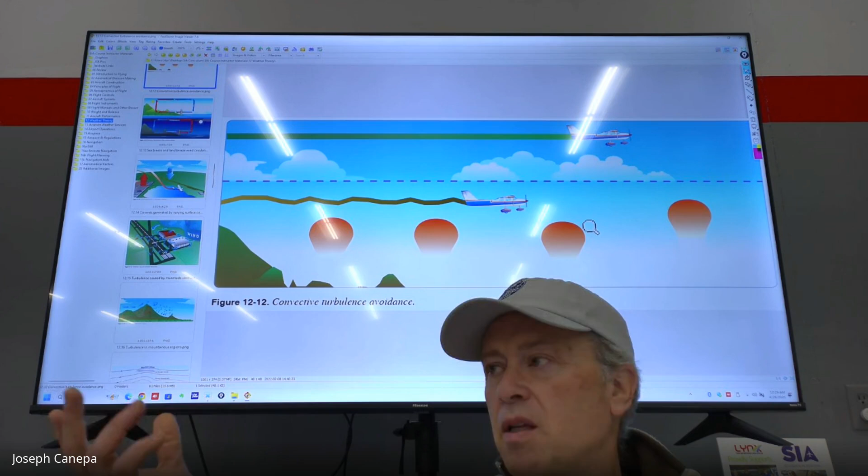And when you're flying, if you're flying low enough, you're going to run into this turbulence, these little bubbles of air that are coming up. It could be from a parking lot that's painted freshly black, or maybe they just laid out asphalt. It's really hot over that little parking lot. That's going to modify the local air mass. It's going to create turbulence, and that's why we encounter turbulence. Typically that extends up to the base of your cloud layer.

And then above that, when you start flying, if you get above the clouds, it's usually very smooth. The clouds, all they're doing is showing you where the turbulence is. When you see real puffy clouds, like cumulus clouds, all they're doing is showing you where that turbulence is. It's actually showing you where the air just kind of stops. It's a great tool to have when you're out flying. If you want to avoid turbulence, you look for the tops of those clouds.

You fly 500 to 1,000 feet above them, and you'll stay in smooth air. Whereas if you stay below them, and in some cases you have no choice, maybe this is complete overcast, and as VFR pilots we can't fly above that overcast layer. So you'd be stuck down there, and you'd have to deal with the turbulence. So again, the sun heats the earth, and it heats the air around it. The air rises, and we get turbulence. That's called convective turbulence. Okay, this is another type of air movement.

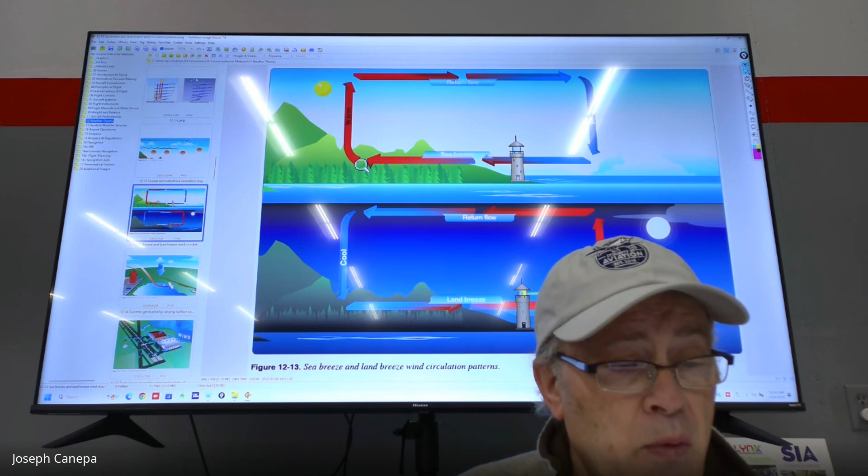So what they're showing here is this typical circulation pattern. If there's no wind, it's going to start developing wind, because the sun is heating the ground. As it heats the ground, the air rises, and then it wants to get back to equilibrium, so once it cools down, it wants to drop back through.

So what happens is you get this circulation pattern in coastal areas, where heating of the air causes it to rise, and as it moves it cools down and starts this rotation. You get air flowing like this. So if I was landing at an airport right here, I would expect some good sea breezes in the area. That's what they're referring to here.

At night, it just reverses the flow, because the ground cools a lot faster than the water. If the water is 55 degrees during the day, it's probably still going to be 55 degrees that same night. But the ground, because there's no sun hitting it, isn't producing any more heat, so now the ground is cooler than the water, and the air descends and goes across the land.

It starts heating up when it hits the water, because the water is now warmer than the land, and then it rises and creates this flow pattern. Again, this is the sea breeze and land breeze wind circulation pattern. We see them a lot.

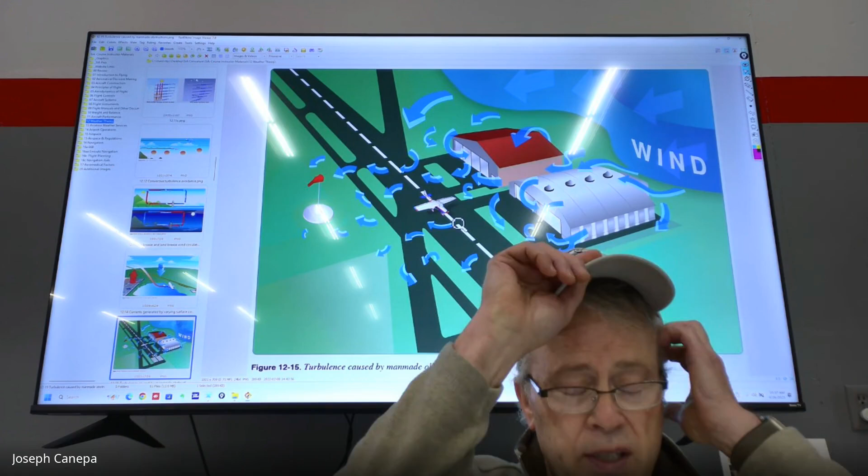Those can be tricky to deal with sometimes on takeoff. Again, it's basically another type of turbulence—I think they call it mechanical turbulence—but it's basically because of the terrain and buildings there. When you fly into big cities, you'll feel the turbulence from the buildings too. Depending on the winds, if there's no wind, you're not going to feel anything—it'll feel totally smooth.

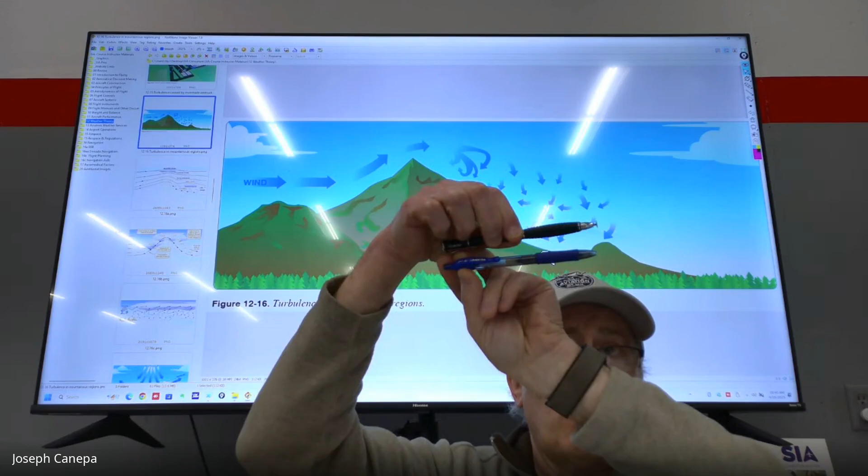So wind shear can also be wind going, you've got two levels of wind here. Let's say one at 1,000 feet, one at 500 feet, this is a 500-foot wind direction and speed. At 1,000 feet it may be 20 knots, and at 500 feet it may only be 1 or 2 knots. That's still considered wind shear, okay? Even though the direction of the wind is the same, that's what we call wind shear, there's a difference between those two. So there's a very specific term for wind shear.

Low level wind shear is commonly associated with passing frontal systems. When you get the low pressure system, usually they have fronts that move in, temperature inversion, and strong upper level winds greater than 25 knots. There's a very distinct number we refer to that classifies it as wind shear. But again, you could have wind shear at 2 or 3 knots, although it's really hard to see. What we're talking about is that generally the wind is changing in direction.

So you could also have at 1,000 feet and 500 feet, maybe the 1,000 foot level is 10 knots but pointed north, and the 500-foot level is pointed east. That's still considered wind shear, because you've got air going north here at 10 knots, and below that at 500 feet it's still going 10 knots, but in a totally different direction. That would also be considered wind shear.

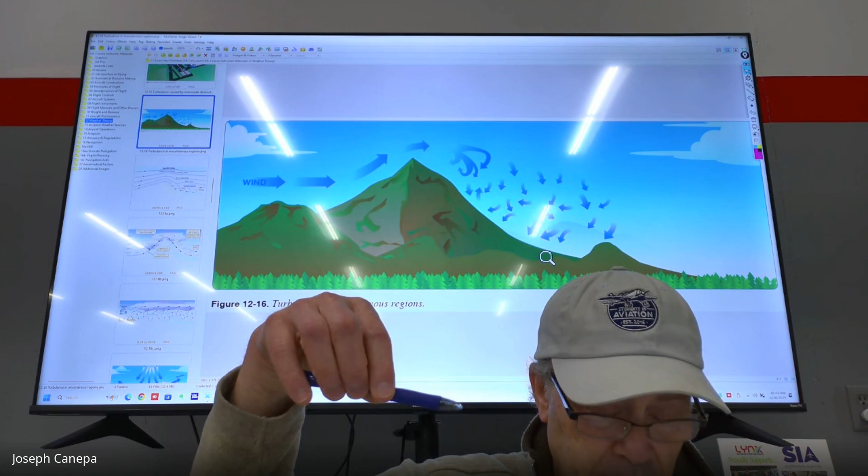The most severe type of low level wind shear is a microburst. Microbursts typically occur around thunderstorms. We'll get into that more later, so I won't talk about it too much here. Thunderstorms are literally weather factories. They produce all kinds of weather, and we see them all the time here in Wisconsin, but other states see them too. Thunderstorms occur a lot, and they produce a tremendous amount of dangerous weather. We always want to give them a wide berth when we fly around them - we don't want to be anywhere close, probably about 20 miles at least.

So, microbursts - they talk a little about the speed and lifespan, and I think you do see this on the test. The lifespan of a microburst is about 5 to 15 minutes - that'll probably be on the written test. During that time it can produce downdrafts of up to 6,000 feet per minute and headwind losses of 30 to 90 knots.

What that means - a headwind loss of 30 knots. Let's say you're flying a Cessna 150 coming in to land. The landing speed on the Cessna 150 is about 40 knots. If you lose that 30 knot headwind, the plane is going to stall, unless you push the nose down and recover. But the problem is, when you're coming in for landing, you're really low to the ground, so if you point the nose down, you're obviously going to hit the ground. That's why we're so concerned about wind shear and microbursts.

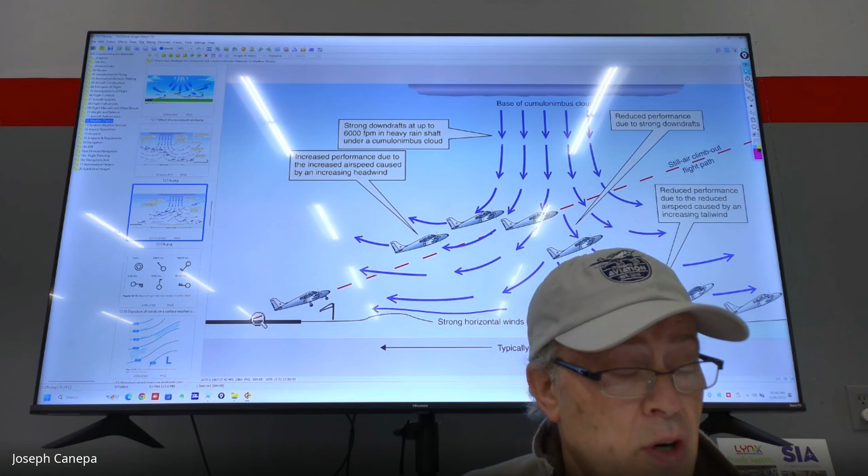There's another diagram showing the exact same thing. Microbursts can be very intense, and we usually see them around the edges of a powerful thunderstorm, but there are cases of downdrafts happening during the day. When you have hot air rising as the earth heats up, at some point that air has to come back down to earth, and that's when you get those downdrafts.

How much altitude? Well, it depends. If it's a 6,000 foot per minute microburst, you're going to lose 6,000 feet in a minute, not to mention all the other things preventing you from getting down. You could easily get pushed into the ground if it's a strong enough microburst and you have a small aircraft—you just don't have the thrust to get out of it.

In a situation like that, if you get caught in a microburst, full power and abort your landing, because there's no way you're going to get down safely, especially in a really steep, strong microburst. It can be pretty tremendous if you're in one. Like I said, 6,000 feet per minute, but you have all these other factors too—the airplane may not be performing as well, especially on a hot day. I don't know if that answered your question, but it's something you don't want to play around with as a pilot.

If you encounter one, you basically want to firewall the throttle, go around, and land at another airport. You don't want to take a chance landing in something like that. They've got wind shear sensors that detect microbursts at a lot of airports—they're that concerned about it. The FAA spent a ton of money on those things because they don't want people to encounter that stuff, and if they do, they want to at least alert them and get them out of the area.

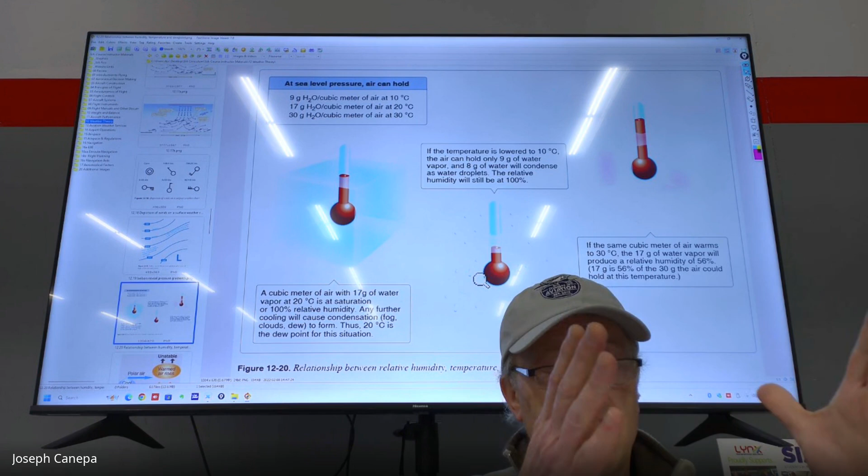When you have hot, humid air—let's say you have a parcel of air that's 70 degrees and humid, and another parcel that's 70 degrees and completely dry—the humid one is going to be less dense than the dry one. Doesn't seem logical. Part of the problem is that when we were kids, or even as adults, on those hot, humid summer days, people say 'oh, the air is so heavy.' That's not the case—the air is so light, that's why you're having a hard time breathing. So when somebody says 'the air is so heavy today, I can't breathe,' it's not because it's heavy, it's because it's light—just the opposite. That's what you have to unlearn when it comes to humidity. Hot, humid air is much less dense than even hot, dry air or cold, dry air.

There's also a couple of things with humidity—temperature dew point relationship. Let's talk about that because it can be confusing. At sea level, air can hold—you don't have to remember these exact numbers—but at sea level pressure, air can hold 9 grams of water per cubic meter of air at 10 degrees Celsius.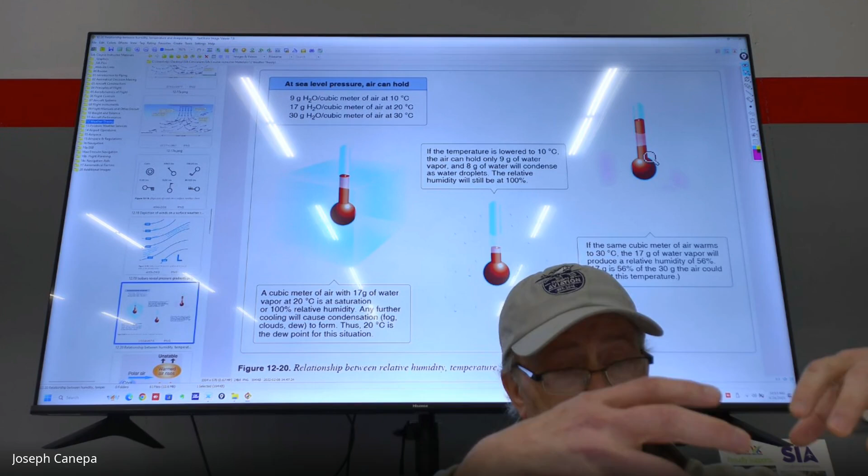You get the cold polar air that comes in from the north, and you've got that moist tropical, maritime air that comes in from the Gulf, and it hits that, and we get thunderstorms or snowstorms.

So 9 grams of water per cubic meter can be held by a parcel of air that's 10 degrees Celsius. Anything above that — let's say the water vapor increases — it actually condenses and turns into rain or snow. When water vapor increases beyond 9 grams per cubic meter of air at 10 degrees Celsius, you're just going to get some sort of precipitation, because that parcel of air can no longer hold all that water vapor; it has to release it, and that's when you start seeing snow or rain or something like that.

Think about this again: you've got cold air here, and cold air at 10 degrees Celsius, which is relatively cold, can only hold 9 grams. And at 30 degrees, we can hold 30 grams in that same parcel. So in cold air, it's not that it's dry, it's just that it can't hold as much.

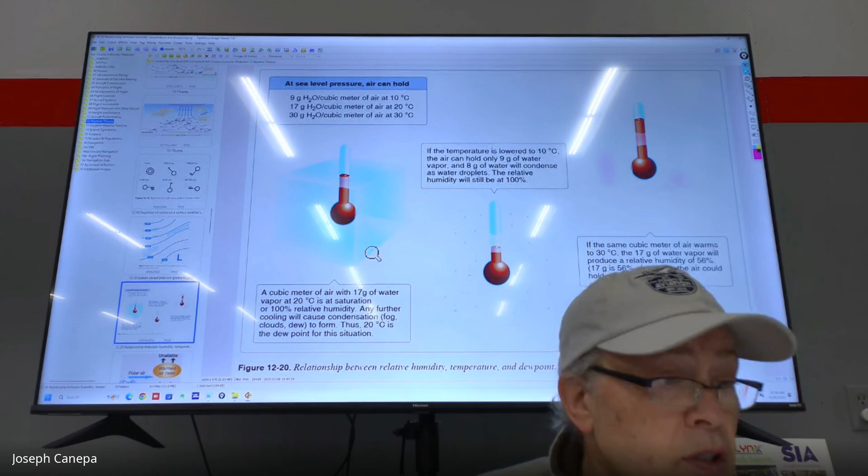Let's talk about clouds. There's four different types of clouds: you have low clouds, middle clouds, high clouds, and then you also have clouds with extensive vertical development, like thunderstorms and things like that. Let's see those.

Here's the different diagrams - this is a classic diagram they show in a lot of books. You've got nimbostratus, nimbo meaning rain, stratus meaning stratified. Does everybody know what stratus or stratum means? It's like a straight line, basically. When you look at stratiform rocks, you see lines of rocks.

We see those actually south of Barrow - there's some areas with stratiform layers of rocks. It's the same in aviation. You've got stratiform rocks and things like that, forming in lines.

That's typically what we see on the ground - stratocumulus. Cumulus are usually a little puffier. You've got altostratus - these are middle clouds, by the way - and altocumulus. Alto indicates the middle.

That's like the singing voice, I think alto is a voice, anyway. You've got altostratus, which are again very stratiform, very flat, and they form larger areas. Altocumulus are again fluffy clouds - when we look up into the sky and see those little billowing clouds, those are like the cumulus clouds. Alto means that they're smaller clouds up there.

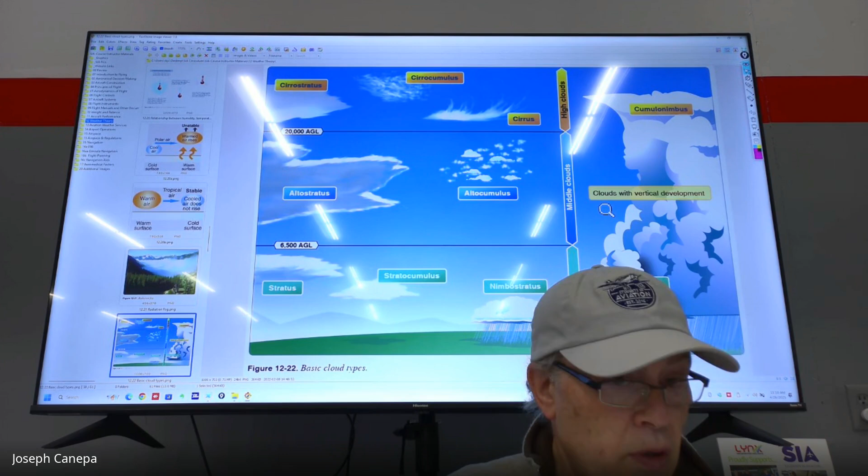One thing about air masses is, as an air mass moves across the Earth, it acquires the characteristics of the surrounding area. So let's say an air mass is moving from Canada. Canada, relative to the Atlantic or Pacific Ocean, is not made up of a lot of water compared to the oceans. So the air coming down from Canada is fairly dry - we call that polar continental. It's an air mass moving across Canada, and because Canada is dry and cold, it acquires those characteristics, cold and dry, and that comes down. We get the cold air as it moves down from the polar areas. So that's the air mass modification, the characteristics it's actually bringing in.

Whereas an air mass coming from the Gulf of Mexico, we can say that it's not continental, because it's coming from the oceans. So that is a maritime air mass, and it's going to acquire a lot of...

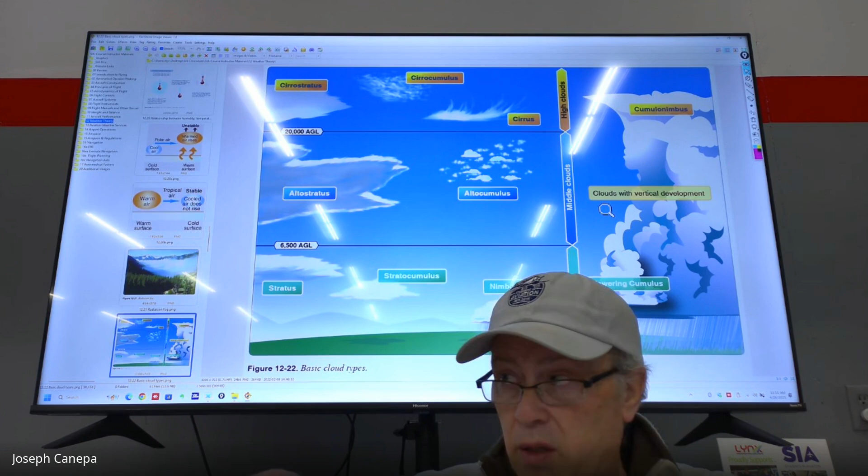So is it possible for these, without a hurricane or anything, to reach Mach 1? Like wind speeds without a hurricane? You're asking the wrong guy. I have no clue. Yeah, it's fascinating, but I honestly don't know how fast they can go. Could happen, but it's never happened. Yeah, I've never heard of it, but again, I don't know that much about it. I know just this much about weather right here.

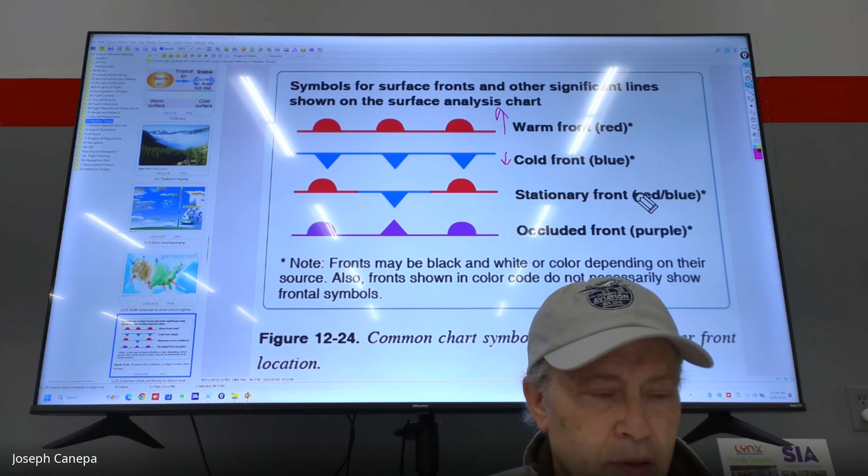An occluded front we'll get into—it's not something we talk about much, but there are situations where you see that. By the way, an occluded front is when one front, like, takes over another one. So let's go here—here's a good example of a warm front right here. You can see the direction of air.

So the warm front is moving in this direction right here. Let's see... I'm gonna click here. Yeah, and then the warm front is moving in that direction.

So this is typically how warm fronts will move. They'll be within like a low pressure system, but you'll have that warm front moving through that low pressure area there.

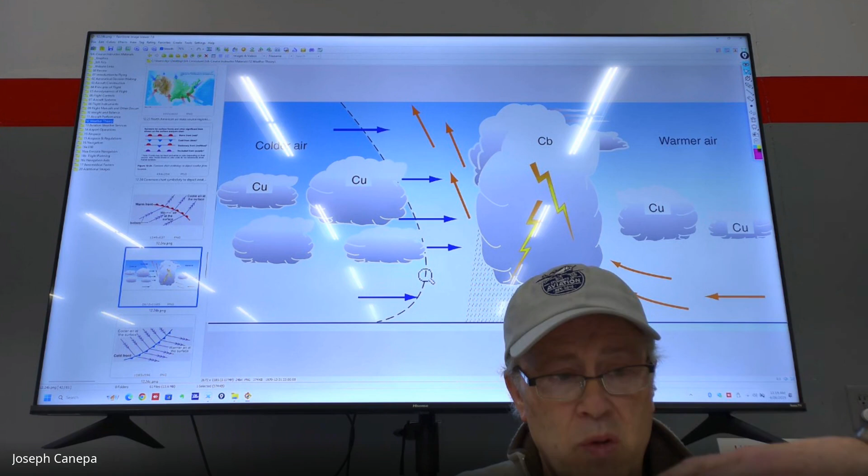And this is kind of what we're talking about with the maritime tropical air masses hitting the continental polar masses. When they collide, this is the kind of stuff that you see.

Can you guys still hear me in the back there? You can't? Okay, we'll wait till again. One second for people at home.

So again, you've got cold air from the cold front hitting that warm, moist air. That's when you start seeing precipitation, thunderstorms, snowstorms, and stuff like that. This would be like coming from Canada, for instance. And as it gets closer to that warm air, that's when you start seeing some activity, some thunderstorms and whatnot.

You can see how it's going to modify, change things - there's going to be a definite difference between temperature here and temperature on this side. This is going to be the warmer air, and this is going to be the cold air. When those two collide, you're going to get some sort of precipitation or something, if the air is moist.

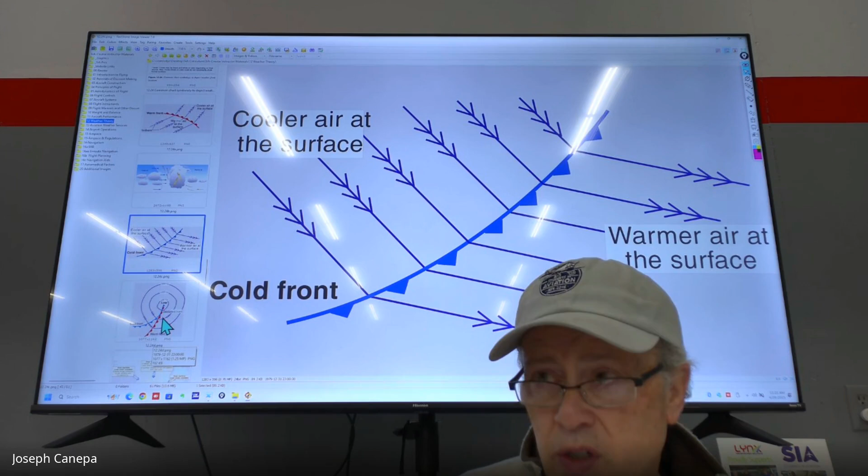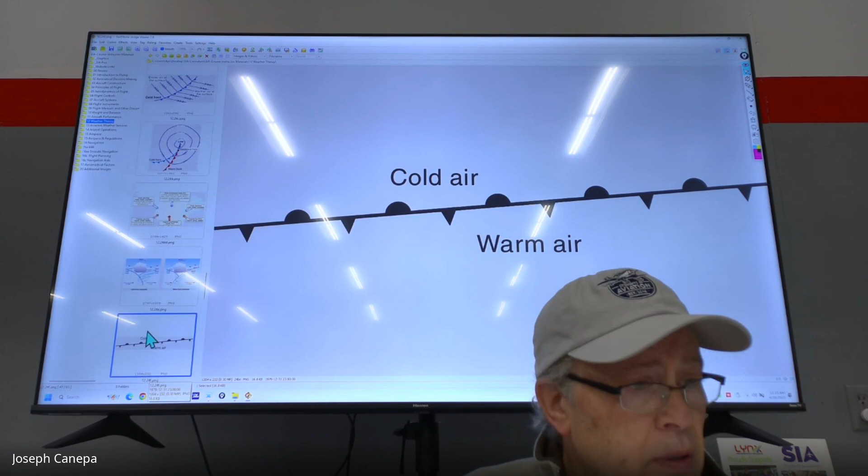Right, go here, let's see. Cold air, yeah, let's see. Yeah, you can have fronts that are tied together.

In this case, you've got cold fronts typically. If it catches up to that warm front, which it oftentimes does, you're going to get that occlusion. So it usually starts out like this - you get a warm front on this side, cold front, and that low pressure is causing that anti-clockwise motion. Eventually, that cold front catches up to the warm front and produces the occlusion.

So this is a good diagram right here. This just gives you an idea of how large fronts can be. The front is always reported at the surface of the Earth. So if they say there's a warm front, you may ask, well why don't they call it a cold front if you've got cold air here and warm air here? It's because it's the direction that it's moving in - the warm air is moving in this direction. So right here we've got the warm front, and this is the diagram we'd actually read for this. This is a really good way of understanding how these fronts work.

So this is what it would look like, and this may be, at like 6,000 feet here in Indianapolis, and at St. Louis, it's down at the ground. The clouds are down maybe 1,000 feet.

Again, this is the thing there. We're going to get into METARs, reading METARs next week. So again, another diagram showing warm air and cold air and things like that.

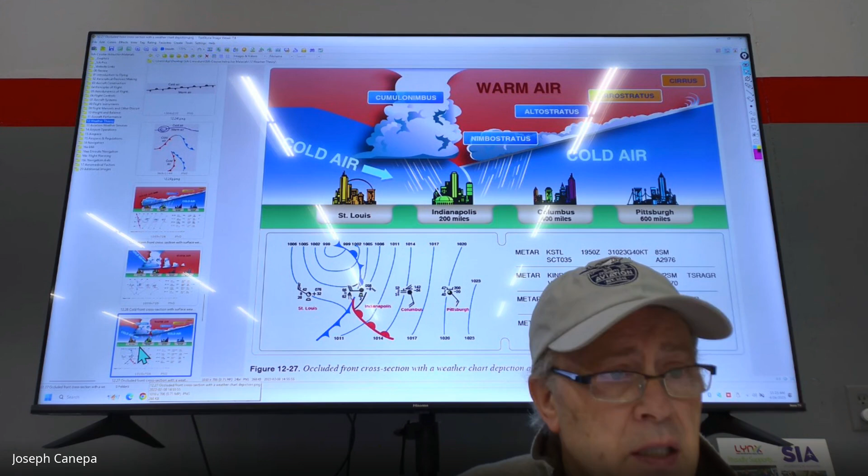So the cumulus stage, let's see if I can find that. There we go. The cumulus stage of a thunderstorm is essentially when it's building. If you can go out on a hot summer day when it's humid and there's thunderstorms forecast, and you see some of those puffy white clouds building, if you just stare at them, eventually, if you're lucky enough, you'll actually see a thunderstorm develop. You're going to see a lot of updrafts, and you'll see it in the moisture in the clouds themselves. They'll be moving up, and in a real strong potential thunderstorm, they'll be going up to that 40, 60,000 feet, and they'll really be developing a lot of vertical updrafts and things like that.

So again, this is the building phase, this cumulus stage. That's where you're starting to build the thunderstorm. You don't know it's going to be a thunderstorm yet until you get to the mature stage. Then that's when you're starting to see lightning, you're starting to see downdrafts. So mature stage, again, it can go all the way up to like 60,000 feet.

And what you're going to have in the mature stage is all those updrafts - they're now starting to slow down as the air goes up. The air is heating, it rises, it sucks in more moisture, it gets to the top, and all of a sudden this air now starts to cool down. And when it does, you're then getting into the dissipation stage, and that's when we get all the rain and stuff like that. In the mature stage, you also see an area where you can see some severe downdrafts or microbursts.

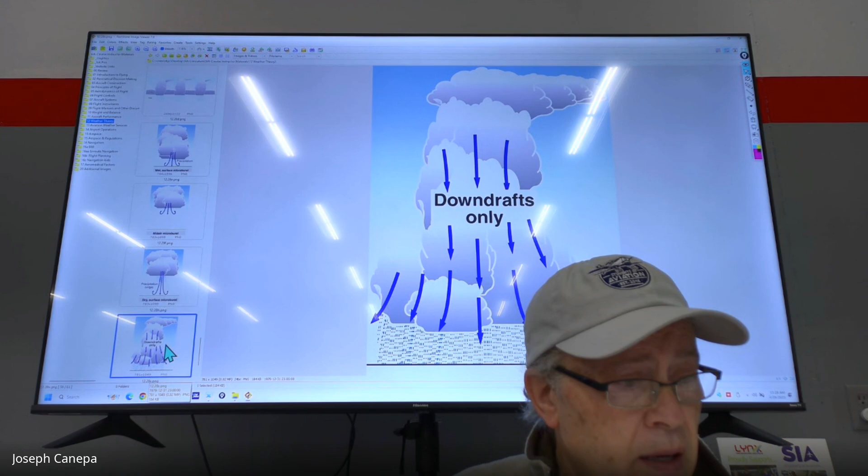Precipitation again, stuff here. Yeah, these shafts of rain can be very strong. That's where you're going to see microbursts and stuff like that. When you see downdrafts in a thunderstorm, that usually indicates it's starting to end its cycle - it's starting to dissipate as a thunderstorm. Whenever you see lots of rain coming from a thunderstorm, that also means the thunderstorm's starting to dissipate.

Here's another one - you've got wind shear in a storm. There's all kinds of stuff, just amazing, and you could obviously have tornadoes as well. Turbulence, obviously we know about that.

Lightning, let me see. Okay, one other thing I want to mention is squall line thunderstorms, and then we'll call it a day. So squall lines are essentially fast-moving areas of cold air.

And you get this line of super intense thunderstorms. Whenever you hear somebody say there's a squall line thunderstorm, take it very seriously, because they are extremely violent. In aviation, even if you're an airliner, you don't want to be around a squall line thunderstorm, because the line can extend 40, 100 miles or something like that. It's basically just an area of fast moving cold air - it hits that hot, moist air, and because of it, that reaction is really rapid. So you get these building thunderstorms, and they produce all kinds of nasty hail and things like that.

So next time we have a really bad thunderstorm move through, just do a little research on the TV or internet to find out what caused it, and you can apply some of these things.